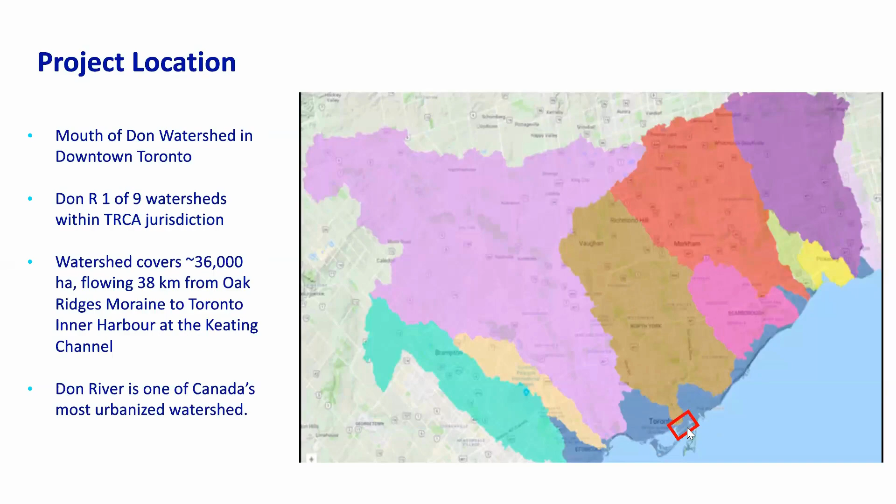For those of you who aren't aware of the project, it is located in Toronto, at the mouth of the Don watershed, which is one of 9 watersheds in the Toronto and Region Conservation Authority jurisdiction. We're located in the Portlands area as the Don River enters into a shipping channel called the Keating Channel before going into Lake Ontario.

The project area for the Portlands flood protection has been identified as the immediate area surrounding the mouth of the Don River and the Keating Channel. This is also the heart of a lot of other infrastructure activities that are currently underway.

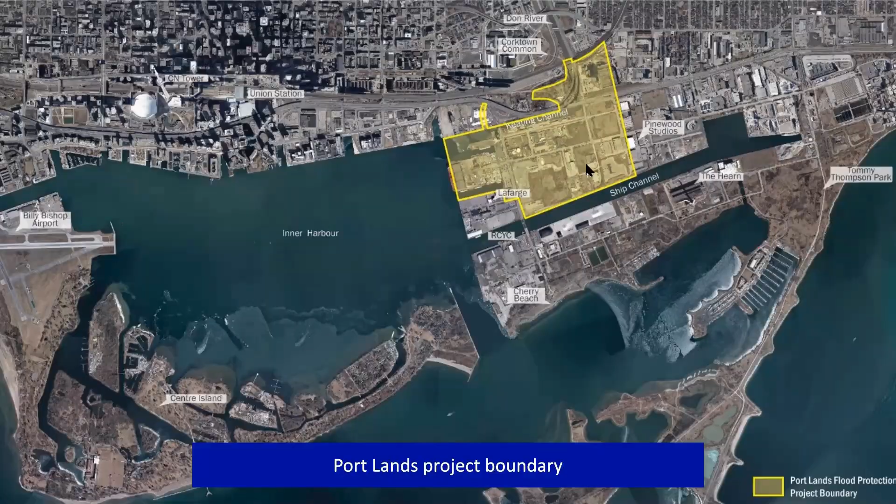This is an area that has a lot of history over the last 200 years. This used to be the location for one of the larger coastal wetlands in the Lake Ontario drainage area, called the Ashbridges Bay Wetlands. Back in the early 1900s, the Port Authority, which was the harbor commissioners at the time, decided they were going to fill in the marshes and create a large industrial area to accommodate an expanding shipping industry and other industrial activities within the Portlands area.

We had a heck of a lot of refining capacity located in the Toronto area in the 50s, 60s, and 70s before declines and the activity was discontinued and relocated elsewhere. As a result of that industrial activity, we have a legacy of significant hydrocarbons located within the groundwaters and soils of the Portlands area.

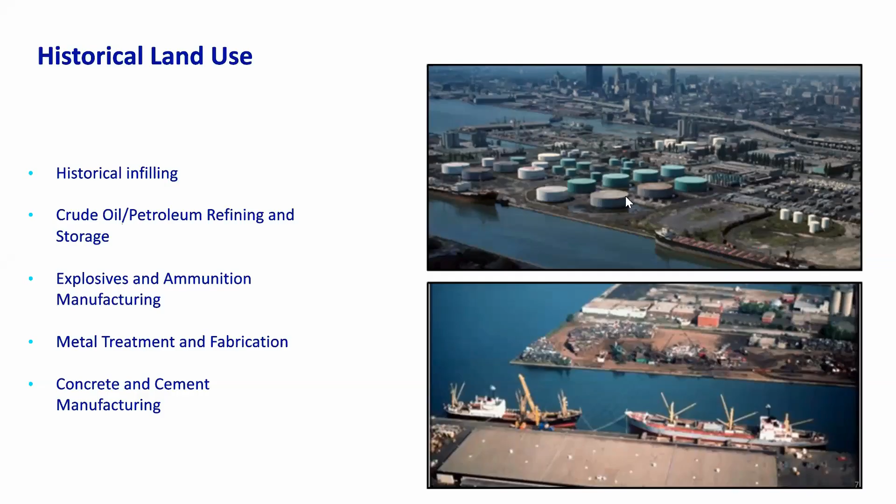We also had, during the wars, munitions and explosive manufacturing within the area. There's also a significant amount of metal treatment, fabrication, and concrete and cement manufacturing, which is one of the main activities currently underway to this day.

The Don River itself is a very sediment-laden river. It has always been known for high turbidity and high sediment loads, which contributed to the creation of the large wetlands in the first place before the city's development occurred. But as soon as we put the river into a 90-degree corner with the Keating Channel and disconnected the mouth of the river from coastal processes in Lake Ontario, we ended up with a significant sediment management issue in the Keating Channel.

We get about 30 to 40,000 cubic meters of sediment deposition in the Keating Channel each year, which needs to be dredged. Otherwise, it would rapidly fill in and substantially increase the flood risk in the area. Being one of the most urbanized watersheds in Canada, we also have a significant amount of garbage that floats down the river that has to be removed before it gets out into Lake Ontario.

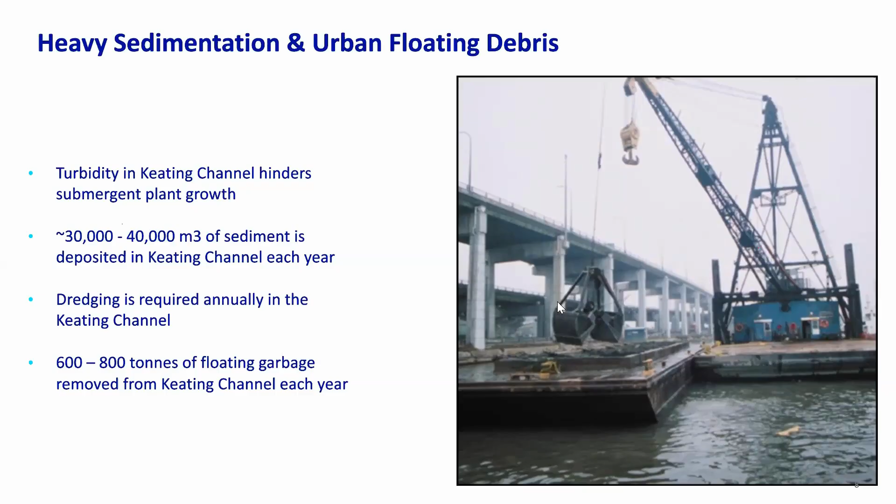There's a lot of navigation on the inner harbor, and the Port Authority is responsible for trying to minimize impacts and collisions with those vessels by managing the debris before it gets into the lake.

As you can imagine, habitat is significantly impacted in the area. You can see here, looking westward of the Keating Channel, it is a deep channel with straight vertical concrete walls. There's a lack of physical habitat, and we have a lack of vegetation on the riparian or submergent areas.

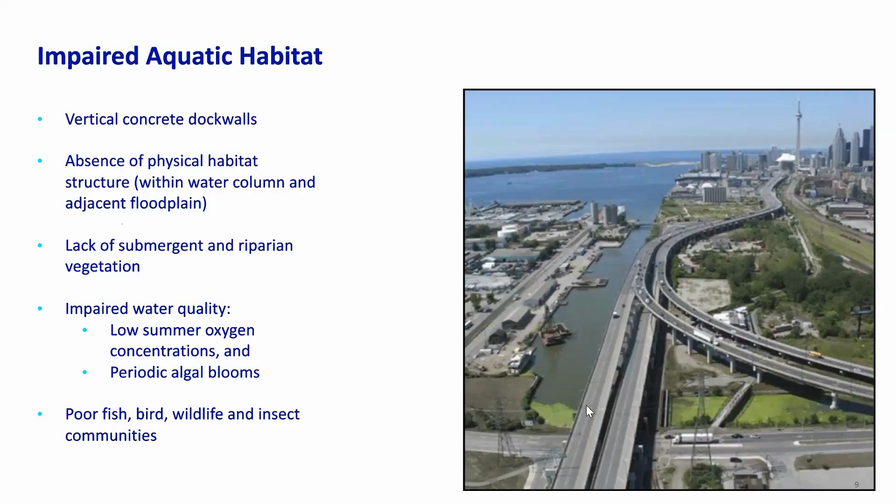During the summer, particularly hot summers, we get into some issues with water quality - low oxygen and high nutrients - which can stimulate the creation of significant algae blooms. Overall, the existing habitat is nearly non-existent for fish, birds, wildlife, and other communities.

So that was the existing conditions. This was a priority for communities since the 80s to try to improve. Over the 90s and early 2000s, we worked together to get ourselves in a position where the political powers saw the benefits of not only resolving the flood issue, but greatly creating and improving the ecological conditions of this river mouth area.

Three environmental assessments - two of them focused on the river and infrastructure around the river - worked in tandem: the Don Mouth Naturalization and Portlands Flood Protection Project, and the Lower Don Lands Master Plan, which basically identified a network of roads and infrastructure to go around the future river conditions. These were undertaken in parallel and approved in 2014 and 2015.

Most recently, there's another EA that was completed in 2017, the Gardiner East relocation and removal, that will open up public access. Portions of that project have been added to the Portlands project as recently as December 2020, so we are taking on some of the works, particularly where the Gardiner crosses the Don River before it gets into the Keating Channel.

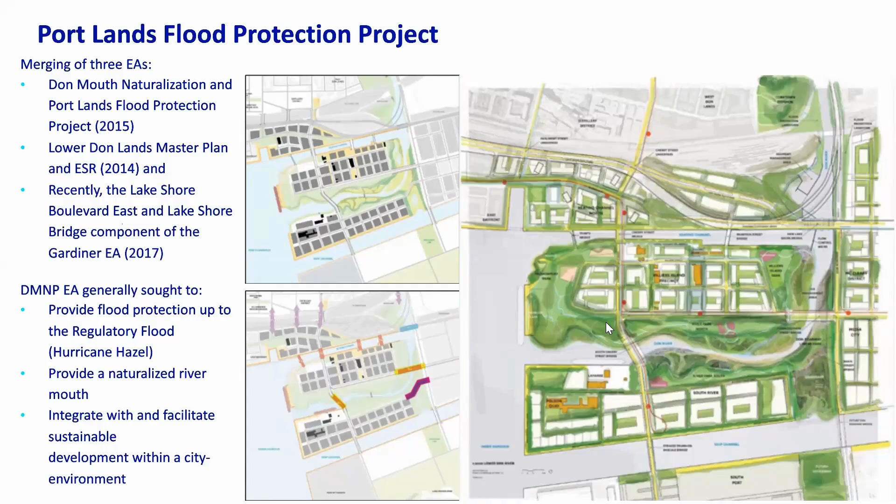So the Don Mouth project is basically looking to provide flood protection, to provide a naturalized river mouth, and also to integrate and facilitate the establishment of a revitalized, sustainable community in the area.

The intent of this is to create a naturalized river mouth that goes through the central channel valley system to allow fish and other wildlife to move up into the watershed. These two other spillways, one into the Keating Channel and one into the Ship Channel, provide capacity to split the very large regulatory flows into different paths, reducing erosivity and providing multiple outlets for the floodwaters to get out and into the lake.

The modeling has demonstrated, for the Don Mouth EA, that we can contain the regulatory flood event.

We had a little bit of an issue on the EA north of the railway tracks on the east side, but we found ways to resolve that. The main reason we didn't do anything there at the time is because most of that land is in private ownership and there wasn't development pressure to do so.

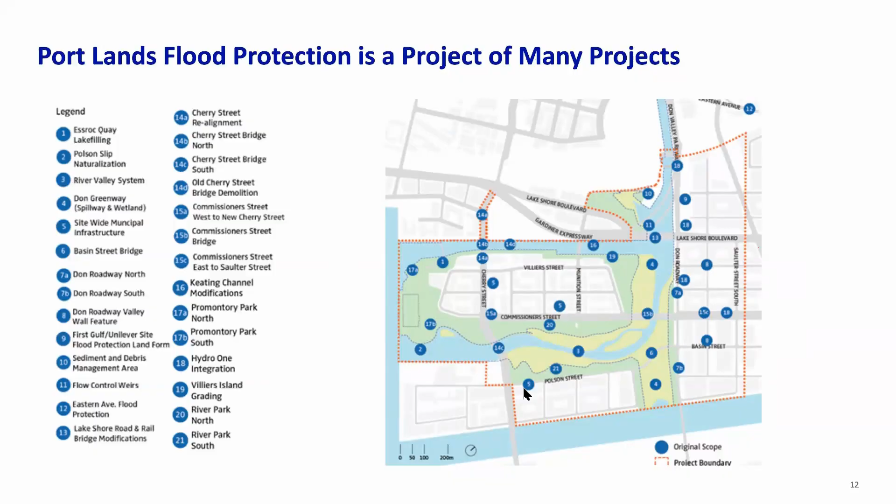Underlying all that is the question of how you manage contaminated soils left behind by the legacy of industrial activities. With that, I'll pass it over to Joey, who will talk about how we actually constructed the valley system and dealt with the soil conditions in the area.

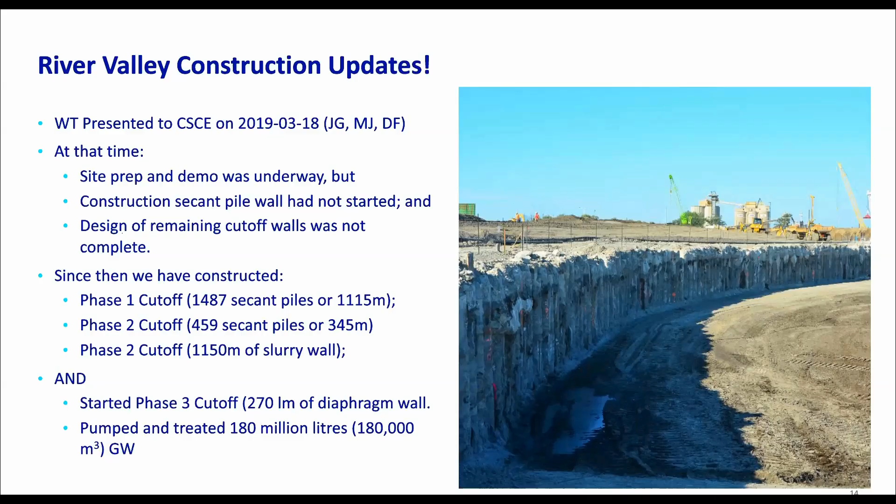A number of secant piles in 2 phases of work, over 1 kilometer of slurry wall in the second phase, and we're currently constructing approximately 270 linear meters of diaphragm wall. This is a buttressed wall that will form the west plug where the river will meet the lake. I haven't included the length of those buttresses, but this wall will serve as a dam for approximately 2 years while we're constructing on the inside, on the dry side, and then eventually we'll cut that wall down and connect to Lake Ontario. We've also pumped and treated about 180 million liters of contaminated groundwater.

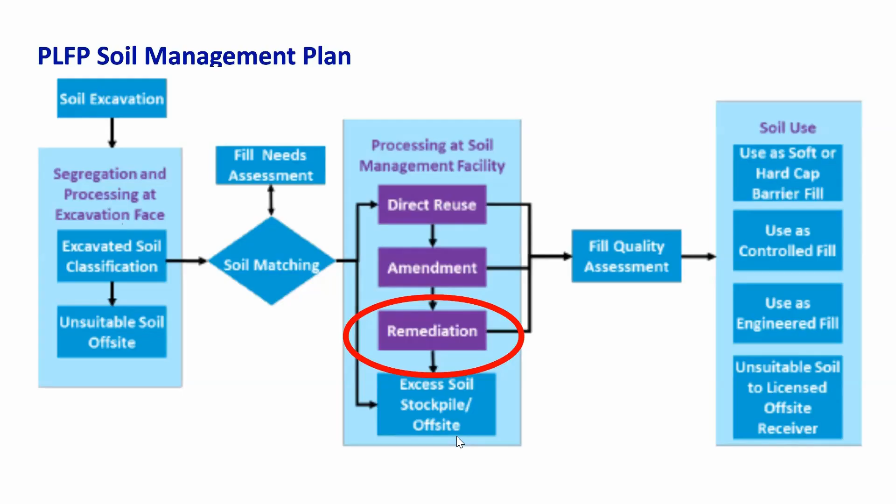This is a high level schematic of the soil management plan for PLFP. What I want to focus on here is what's circled in red, the remediation box. We just very briefly talked about how we would segregate soils.

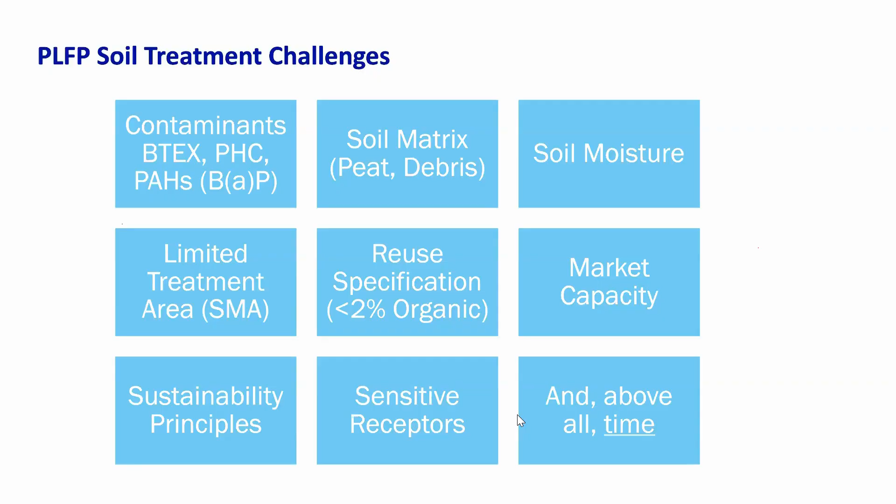The soil in the Port Lands has a real variety of contaminants present, most related to the petroleum hydrocarbon heavy industry historically there, but other industries contribute to the mix too. We have different soil types ranging from highly organic, almost like peat, to pure debris and garbage needing off-site disposal. Soil is often heavily saturated, so we have a range of moistures. We have a limited treatment area, strict reuse specifications, limited market capacity for reuse or landfill, cost concerns, but our biggest challenge is time.

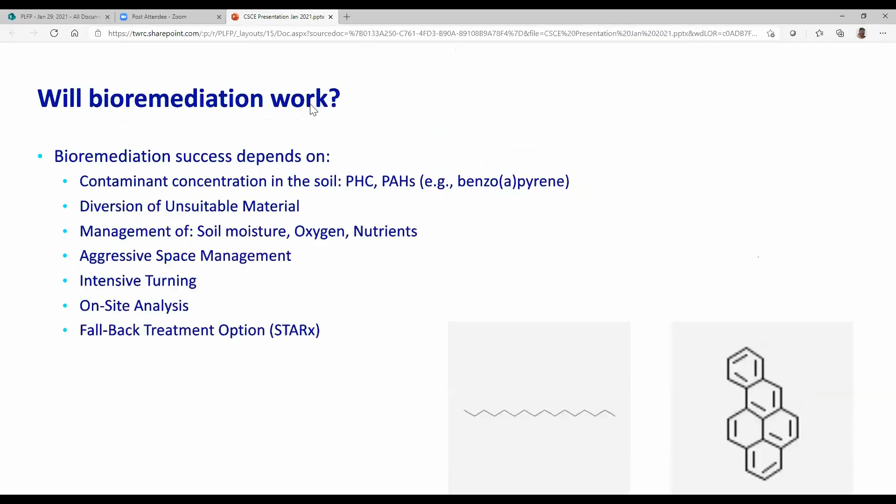For those not familiar, contaminants provide the fuel and microbes naturally present in the soil do the work. They need oxygen and nutrients to do this. These microbes aren't your standard probiotic, but naturally occur in the soil, and they convert the long chain hydrocarbons into carbon dioxide and water, and usually heat energy.

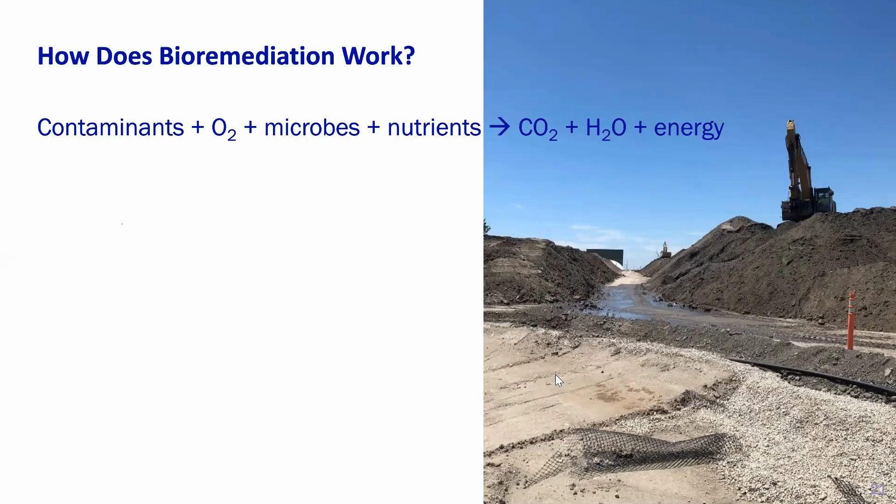This is a large scale science process, and we're managing all of these factors. We can control oxygen by mixing, moisture by adding water, and nutrients as needed. We're also measuring effectiveness by testing for contaminant concentrations, but also measuring temperature, carbon dioxide from the pile, oxygen in the pile, and so on.

On the left-hand side of the image is a standard diesel molecule. On the right is something called benzo(a)pyrene. Bioremediation doesn't work as well with the more complex molecules, so we knew we would need a plan and technology available for those more complicated hydrocarbons. But this is a quite effective method for dealing with hydrocarbons like diesel and gasoline that we have a lot of on our site.

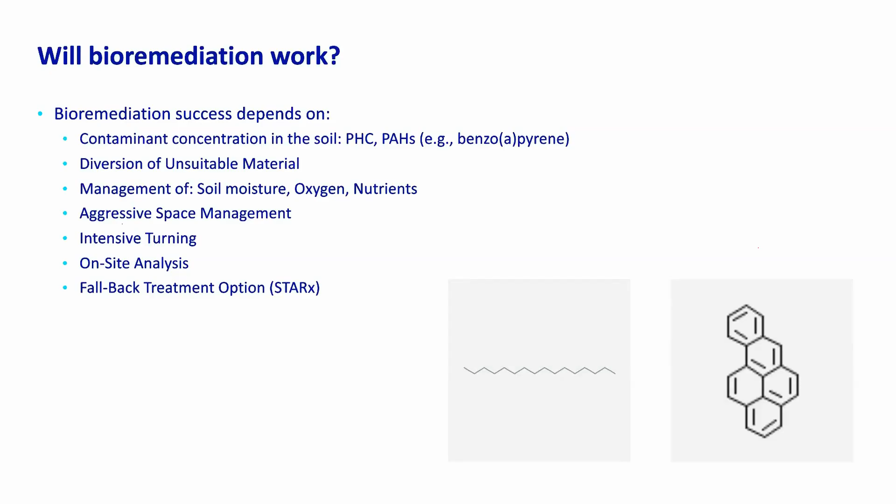Our fallback is a treatment option called STARx. STARx is an ex situ smoldering combustion technology. This also underwent on-site pilot tests in the spring of 2017, in 2018, and we did a larger scale pilot last winter, January of 2020. The soils we're targeting to put through this process will have higher contaminant concentrations.

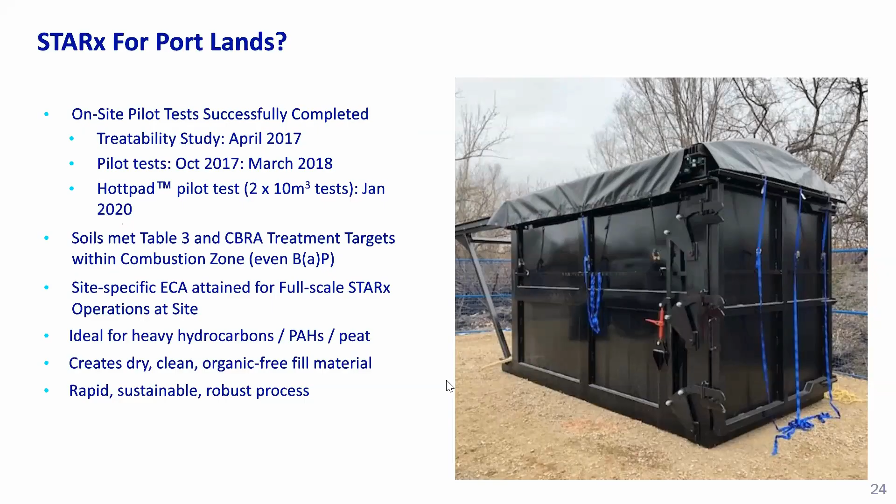There's an ECA that the subcontractor maintains for this technology. It basically creates a clean, dry soil, because it's been heated, free of organic contaminants and organic matter, leaving mineral soil. So it's fairly quick. We believe that it's fairly sustainable and quite robust an option.

I'll spend a few minutes explaining how it works. We use the PHC impacted soil as the fuel. We can inject air and add heat to get ignition, and once ignition has commenced, we can stop the addition of heat, which is basically like a large electrical element. We'll continue to use air injection to force the reaction through the treatment unit, and the combustion continues until all the fuel has been used, and at that point it puts itself out.

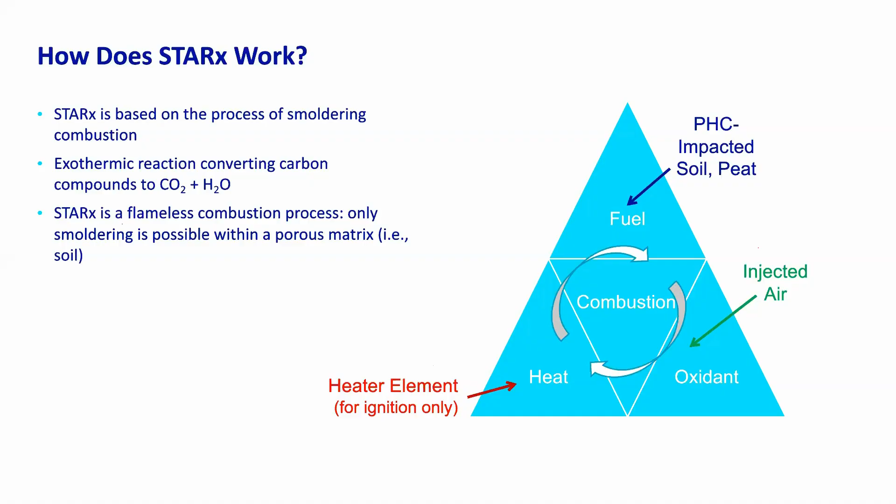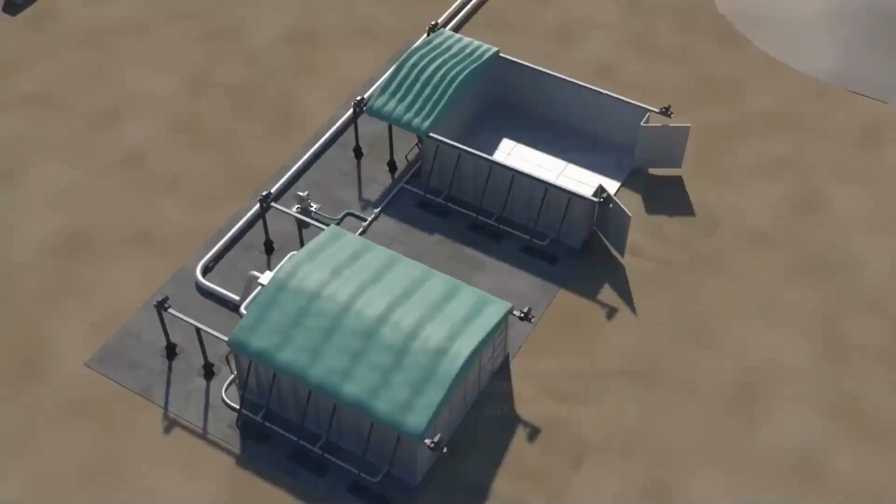So in the next slide, Ken, hopefully this works for you. There we go. Let's just watch. This is about a minute long. There's no audio, so you're not missing anything. I'll try to narrate. On our project, we're going to have 4 of these things called Hottpads.

This is a Savron technology. So they load up these Hottpads with contaminated soil. They cap it with usually soil from the previous batch, or like a clean sand. Close the lid to keep the emissions under control. They all go to a carbon unit to be cleaned and then released.

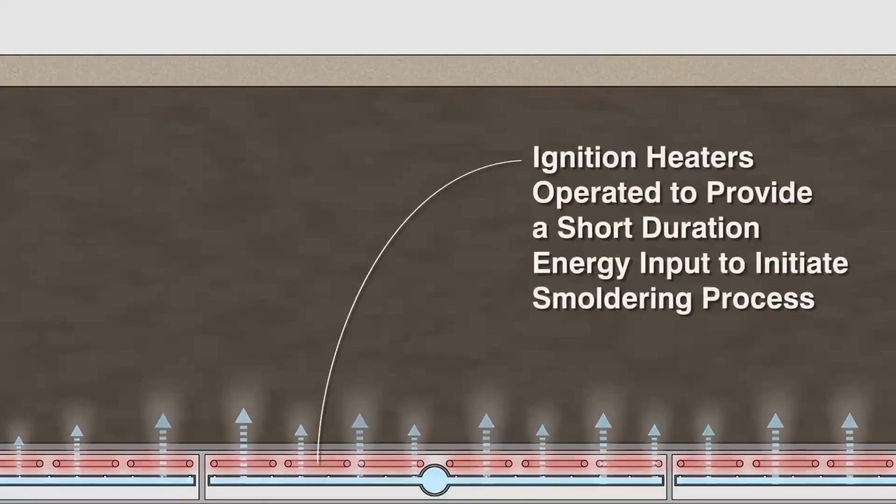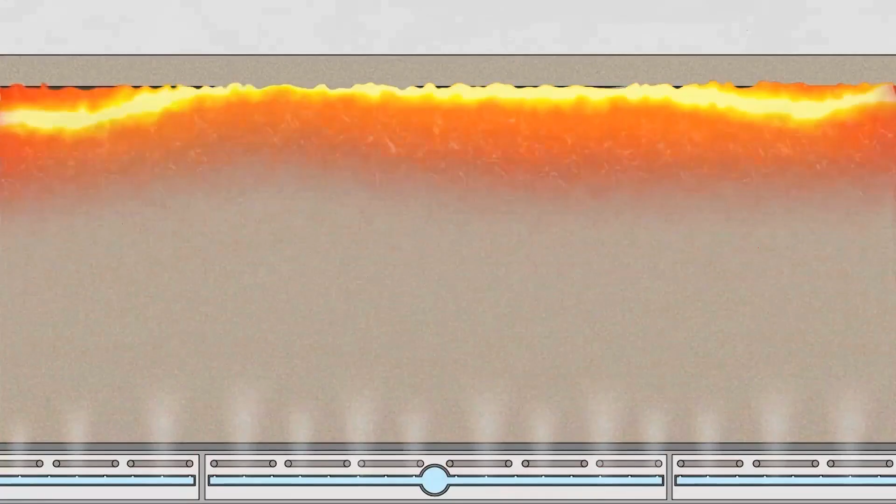We're using electricity to create the heat, air injection. And once the fuel source catches, then we slowly smolder our way from the bottom of the unit to the top. That layer of clean sand on top snuffs the reaction. We're left with a whole box full of clean treated soil.

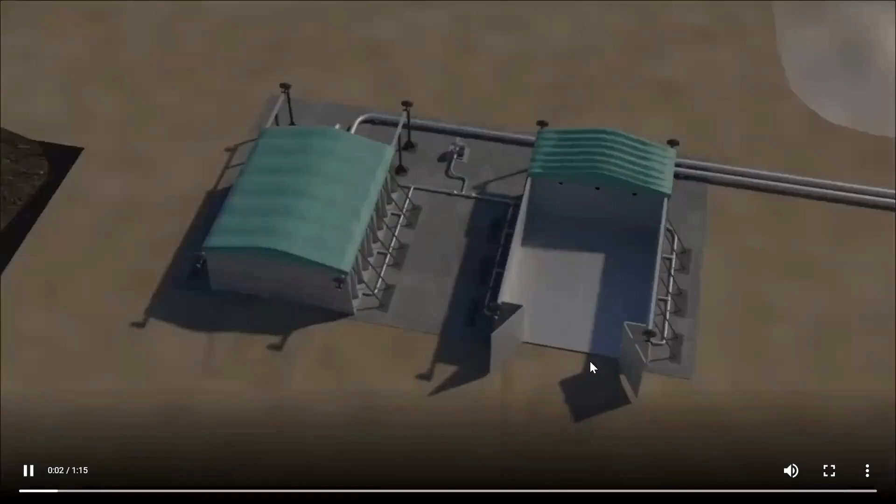So the units that we've built on site each hold 250 cubic meters. Each one is expected to take about a week to treat. So at any given time, we should be loading one, heating one up, cooling one down, and unloading the 4th one. Let's go to the next slide, Ken. We're expecting about 1,000 cubic meters of this soil per week to go through this treatment process.

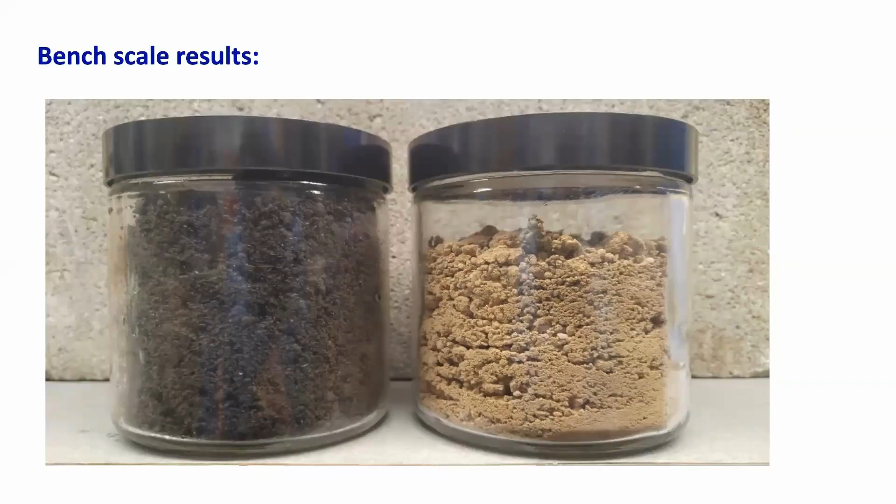Here's quickly a photo of what the bench scale results look like. On the left is obviously the contaminated soil, and on the right is the clean, organic free mineral soil. Looks a lot like sand.

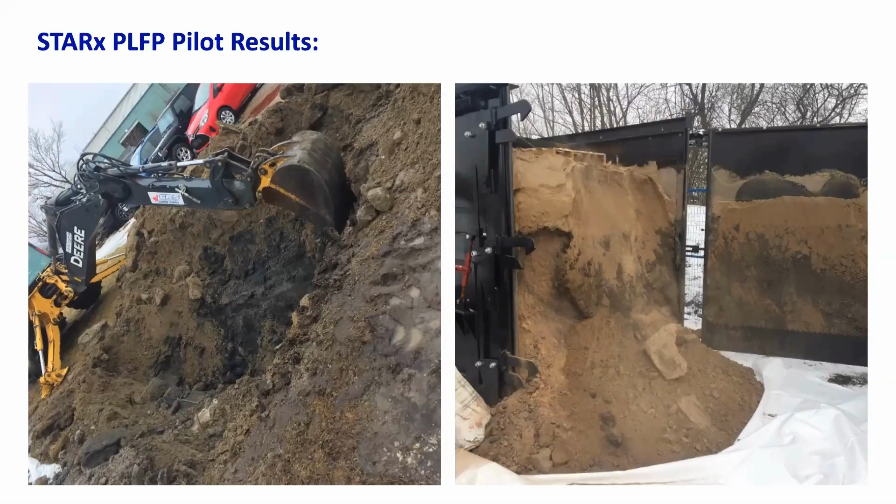Next. I apologize for the angle of the photo on the left, but that's what soil looks like on site. A bit nasty. We loaded it into this pilot scale unit. I think there were 10 cubic meters in there. System worked effectively, and what comes out the other end looks like clean mineral sand or clean mineral soil.

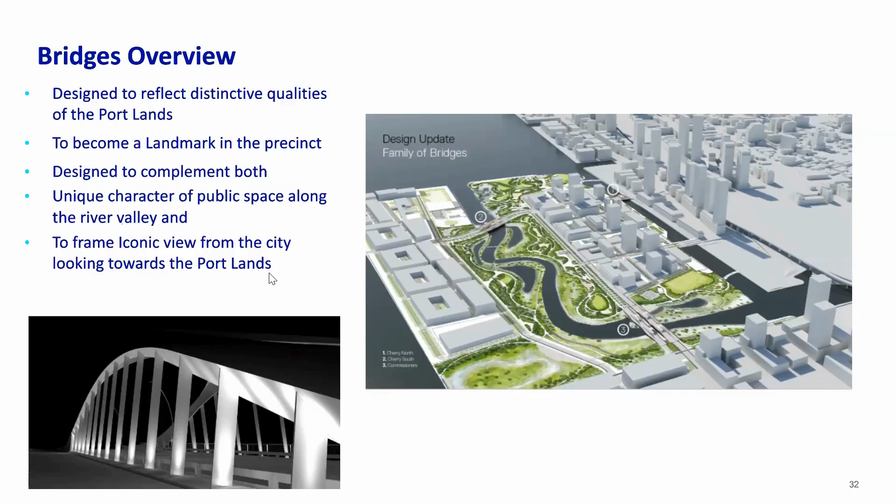Cherry Street North is technically a twin, so there are 2 bridges here. One is for transit, the other is for vehicular traffic. This is the shortest of the family of those bridges.

One thing to note on the design of these bridges: all these new bridges share common elements. They all act as a shell structure under an arch loading. The design team led by Entuitive had endeavored to develop a very streamlined and elegant shape while keeping those bridges pretty transparent, and with that, they went with steel as the element in the design you see here.

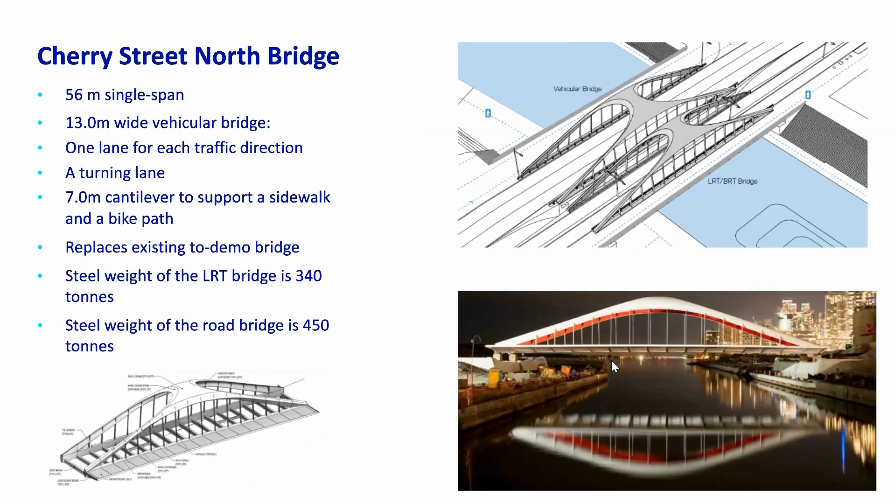Another design feature here is the color. The bridges have interior colors that vary from one to another, reflecting their unique character and illustrating the 3-dimensional shape in a closer experience. With that, we can move on to the next one.

Cherry Street South Bridge is the second longest. It is 110 meters long. The previous one was a single span; this one has a primary span and 2 secondary spans.

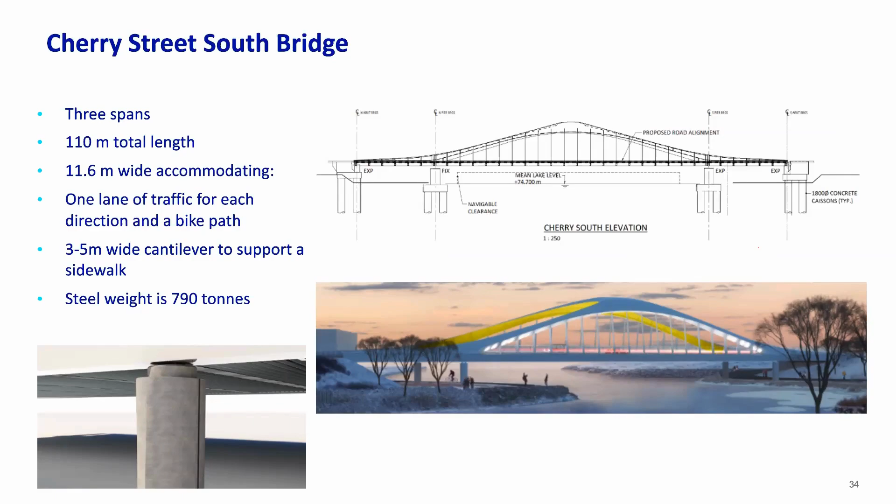On Cherry Street South, the interior color is going to be yellow. In the bottom left, you can see another design feature, the pier supporting Cherry Street South and Commissioner Street bridges, where the pier has a nice elegant shape and also functions in the way it reacts and behaves with water flows and ice flooding.

We can move on. Finally, among the new bridges, Commissioner Street Bridge is the longest at 152 meters in length. You see it has 2 shell structures basically meeting halfway.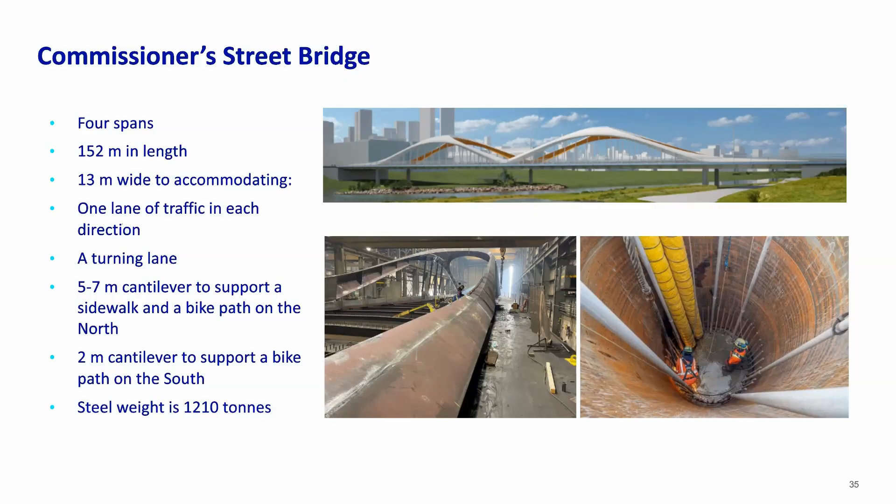So stay tuned. On the right side, just to illustrate the magnitude, this is one caisson for this bridge, the same size caisson we're using for Cherry Street South. It's 2.4 meters, and it goes deep, through bedrock. We can move on, Ken.

So with that, I'll talk briefly about the Lakeshore Bridge modifications. While the new bridges we've been discussing required a great deal of design effort, Lakeshore Bridge is more about structures and engineering.

You see two bays here, the existing bridge under the Gardiner-Logan ramps. As you heard from Ken, the area is subject to dredging and river flows. We need to widen this bridge, make it twice as long, so you can imagine these two lengths on the west side will eventually be turned into water.

So you can imagine what happens structurally here: you have live ramp bents, live bridge bents sitting right around an area that is today soil, and they will become water. At the same time, you could imagine equipment, deep foundation equipment, trying to go there and install caissons or some type of foundation with limited reach, especially under the westbound ramp.

So we've been in discussions, exploring opportunities with our colleagues at the city to analyze the possibility of accelerating the portion of the city's Gardiner EA scope, which includes work on this ramp as well. Finally, the City Council adopted the city staff report last December, supporting us entering into an agreement with the city to deliver these two portions of the projects together.

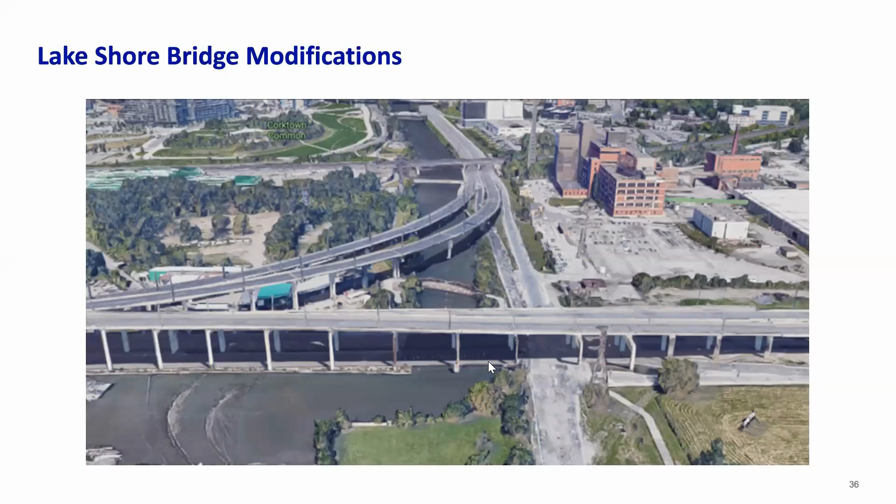It will provide shoreline support for this new area, create a wetland within the river valley, as well as provide some recreational and ecological opportunities for this project.

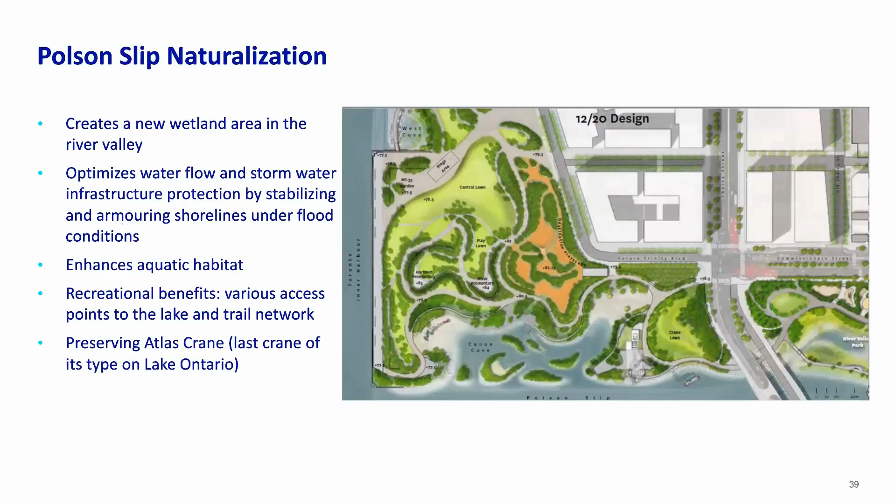For this area, there's going to be a lot of dock wall work, trying to stabilize the bottom portion of the wall and then taking it down, dealing with the soils, treating them, and building up the layers to create the islands and the finishings within that area.

One more interesting thing about the Polson Slip is that it houses the Atlas crane, which we are preserving and which we believe is the last of its kind in Lake Ontario.

Sediment and debris management area is the next one. Going back to the fact we need to widen upstream of Lakeshore Bridge in order to allow the flow to slow down and encourage sediment deposition there, so it wouldn't keep going down to the Keating Channel, as you saw the dredging used to happen there, or even worse, get into the naturalized river.

So that includes deepening of the current channel, and widening again, about twice as much. There will be dock wall stabilization and new dock walls in order to support all this area.

It's very integrated with the delivery of the Lakeshore Bridge, and it's pretty interesting, neat engineering and construction project when it comes to tackling these two projects together, as well as the Gardiner, as you can see.

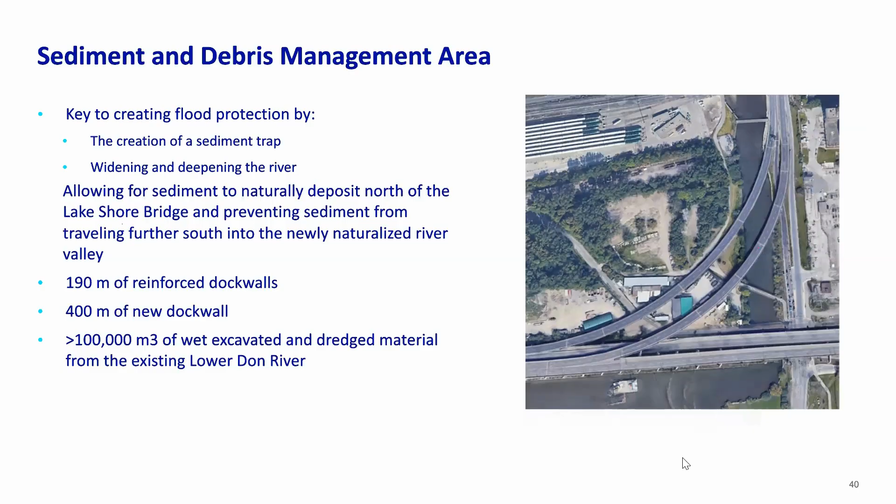You can see here also, in the same principle, the bents are still existing. Eventually they will become part of the Gardiner EA, the DVP ramp bents here. So what we've done in the interim is lower this area enough to allow the water to flow over top and provide flood protection, while keeping it high enough to maintain those bents' structural integrity until it's time for them to go, and this area can be taken back. We'll be building as much of the final structure as we could right off the bat, so it's easier to deal with later.

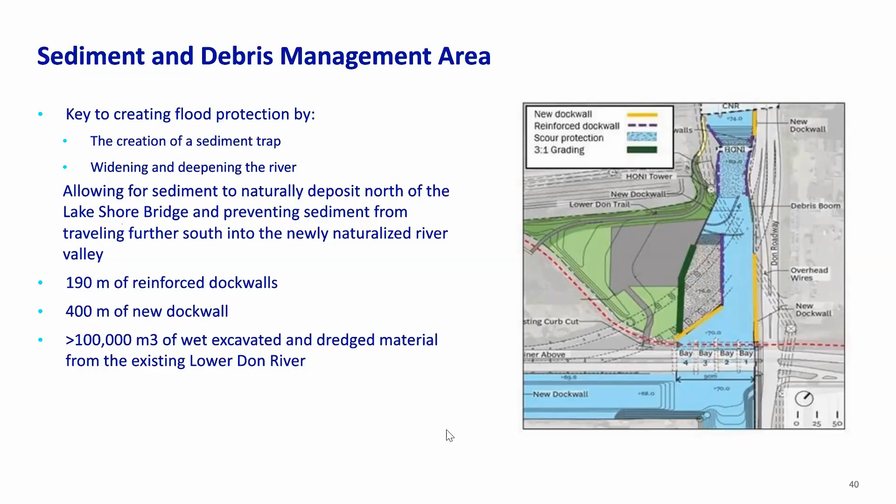Finally, under the marine components, a flow curtain in the Keating Channel. When we started, that was going to be a combination of structured weirs. As the design evolved, our team, led by MVVA, came to a more nimble system that would deliver the same requirements, but is more portable and efficient.

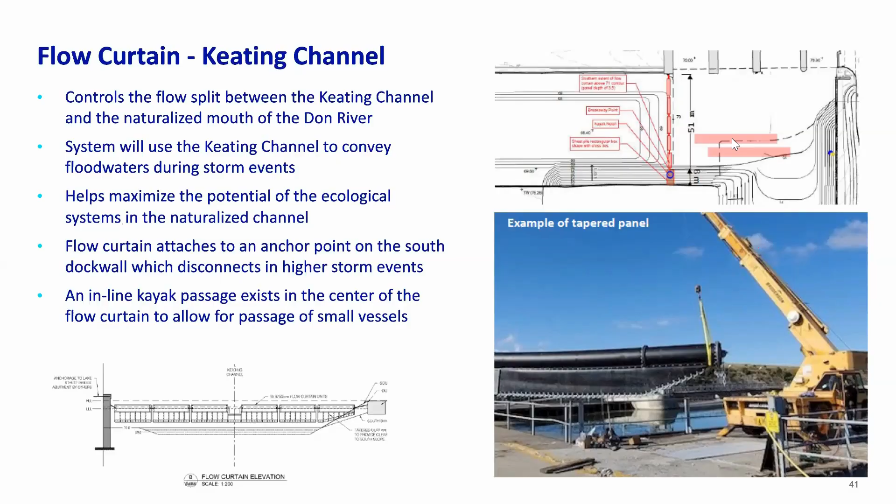This comprises a boom, and the boom has a panel under it. When flows are slower, more water will be flowing in the river. In flood events or higher flow events, the panels will rotate with the direction of the flow, and more water will make its way into the Keating Channel, relieving the river valley.

Move on. This is the final one: the Cherry Street Stormwater Lake Filling.

Built in 2017, this was the first project we built on the Portlands. The CSLF stabilizes the shoreline around the Essroc Quay and provides a lot of ecological habitat and opportunities. Equally important, it supports the new Cherry Street North Bridge that you've seen already on site in the previous picture, as well as the realigned Cherry Street.

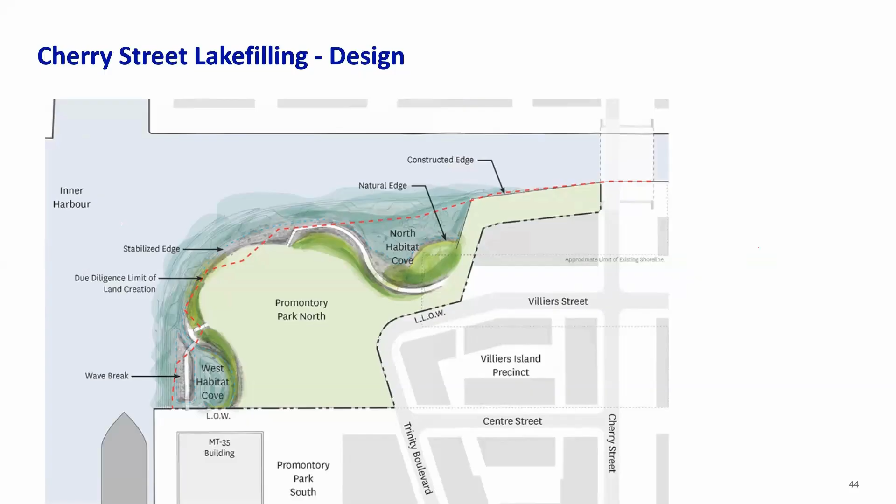Thank you, Ken. Now we're getting into the shallow dives I described. The first one is the lake fill we just went through. You can see the design of the project: it comprises about 200 meters of dock wall on the east side, then two coves, and this whole shoreline is about 400 meters long. It was basically supported by a core stone core before we went ahead and did some revetment.

I'm going to show you some pictures of the construction of that project and how it evolved. The left picture is the very first barge that arrived on site delivering core stone material. As you can see, the lake was almost fully frozen. It was December 2017, and since then we received many more barges and deliveries. I put some numbers for the facts, for those of you who like to see some metrics, and we can move on.

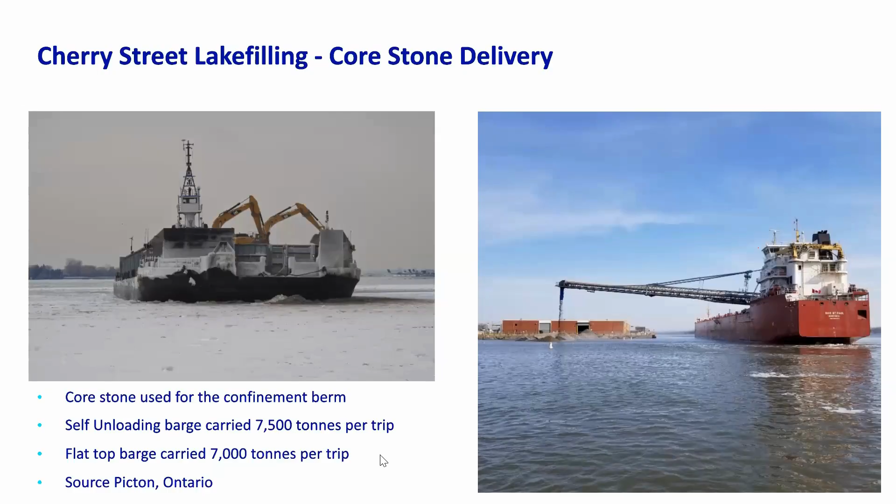There are some examples of the ecological habitat and marine landscaping done there. On the right you could see West Cove, but you're only seeing the trees here—these are not live trees. They are intentionally positioned that way to contribute to the ecological habitat, with a lot of trees, logs, and sunken roots underneath that you won't see.

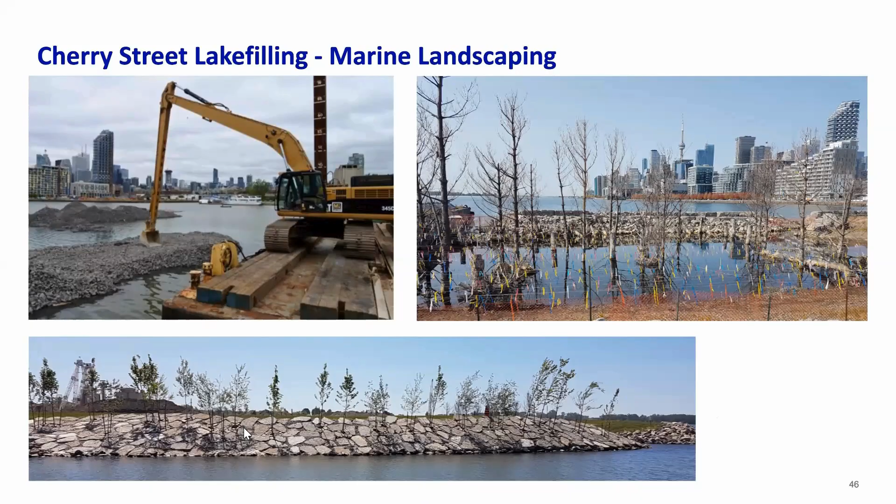In front of the other shoreline, for example in the bottom picture, the interesting part is these are live trees, and they are stable within the naturalized, armored shoreline. So we can move on to the next one.

Now a couple of shots from the same vantage point. This shows when we started in the very first year, 2018. You could see the core stone. In order to fill in the lake, the material has to follow quality criteria, and we had to work within confined water bodies to comply with the confined lake filling guidelines. So we built the green sea cans on that area.

They are what we call the interim berm—the quickest enclosure we could do to start filling while we built the other, larger enclosures that took more time. So the core stone as a core does the basic shaping, as you saw, coming from the vessels. And here is a dock wall. We can move on now, Ken.

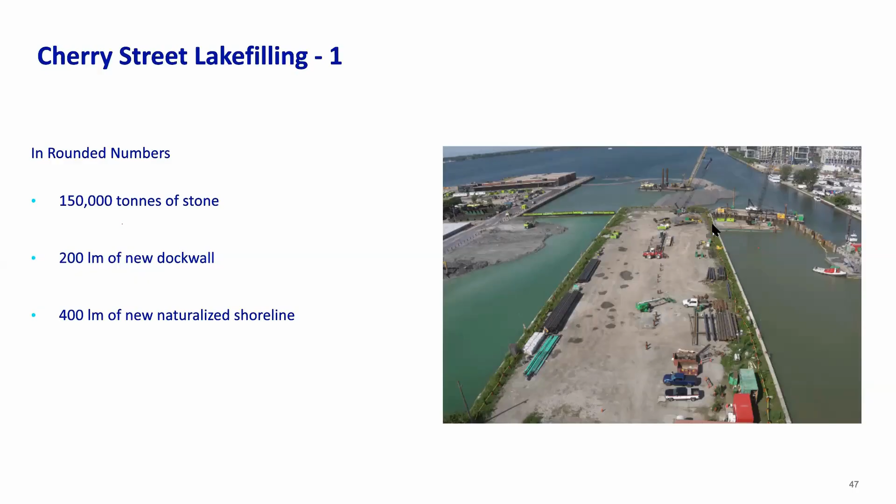As you see, with more enclosures we have more areas being filled. The bottom left part was filled first, and then we progressed further beyond to do that line. Finally we did the fill behind the dock wall.

One thing worth noting here—two things actually—is that closer to the camera you could see the type of fill is different. There is a granular type material, intentionally used there to help with the structural stability of the road and infrastructure that will come over it, and to accelerate the settlement time required. Another interesting fact is that we received 24,600 trucks of material from local excavation sites—material that would have otherwise gone most likely for disposal.

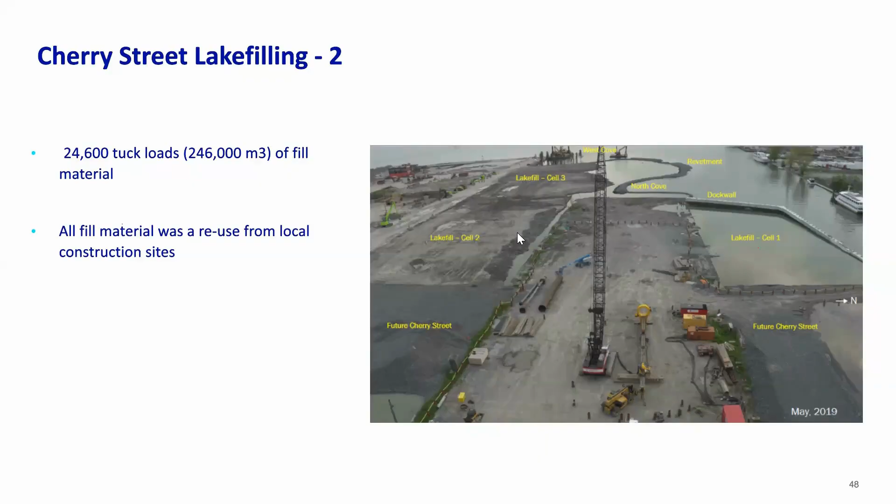The Port Lands part 2 presentation will actually be just about this LRT bridge, as I understand. I highly encourage those of you interested in the details of the fabrication, construction, and design to attend that meeting—I think it's next Tuesday.

So here you could see the bridge. This is all at the Cherubini Metalworks facility in Dartmouth, Nova Scotia. The bottom left shows the transit bridge being fabricated—they start with the bridge upside down. There's a cradle where they do the penetration welds and put together these very thick sheets that have already been pre-bent into the 3D shape in the Netherlands. Once the shell is built, they flip it upside down and start building the rest of the components.

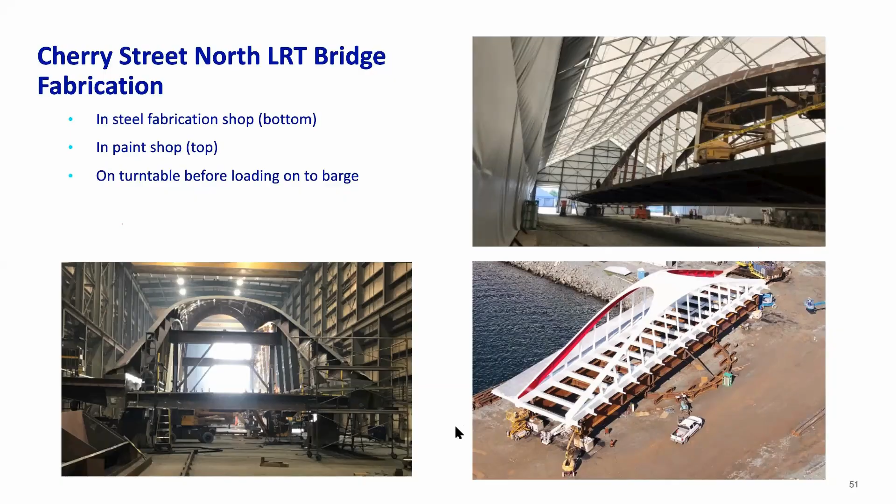On the top right you see the same bridge in the painting shop, and finally in the bottom right the bridge is basically ready to make its way to us. That was another exciting journey for us, when the bridge was sailing through the St. Lawrence Seaway on its way to Toronto.

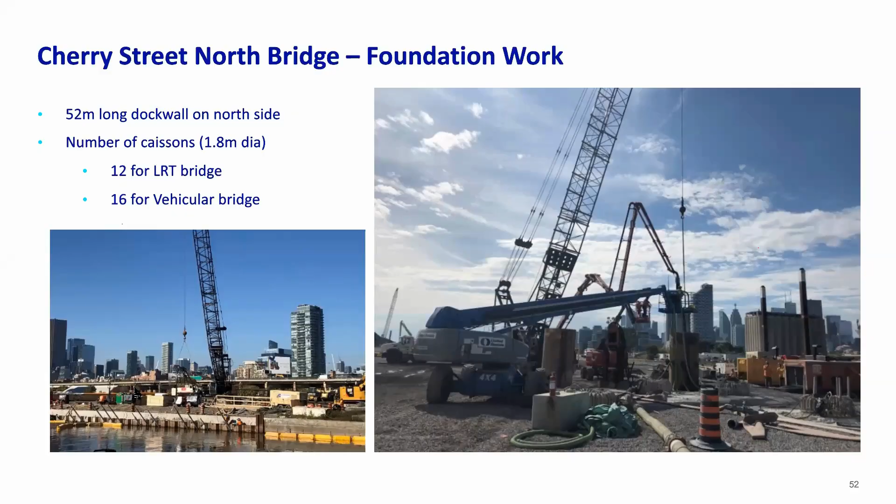There's another link I forgot to put here, but you could look for Bridgewatch Toronto, or Bridgewatch TO, and see a lot of footage about it on Twitter, LinkedIn, and other outlets. So just some images of the construction while fabrication was happening in the shop in Nova Scotia—we were busy building the foundations here, with caisson work ongoing as well as dock wall construction on the north side, to rehabilitate the dock wall before we put the bridge on top of it and limit future opportunities for rehabilitating it.

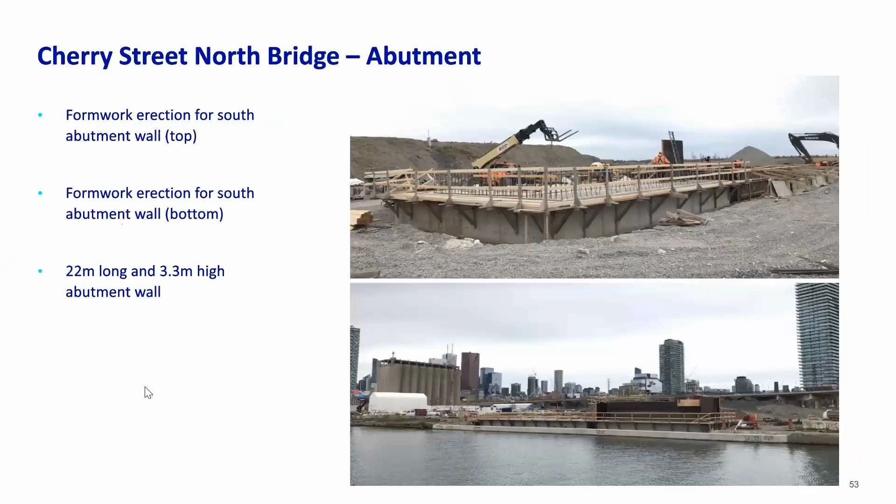We can move on to the next. So more pictures about the construction progress and the formation and construction of the abutments. We'll move on. In other shots, you can see more footage as this progresses, with finally the bridge making its place.

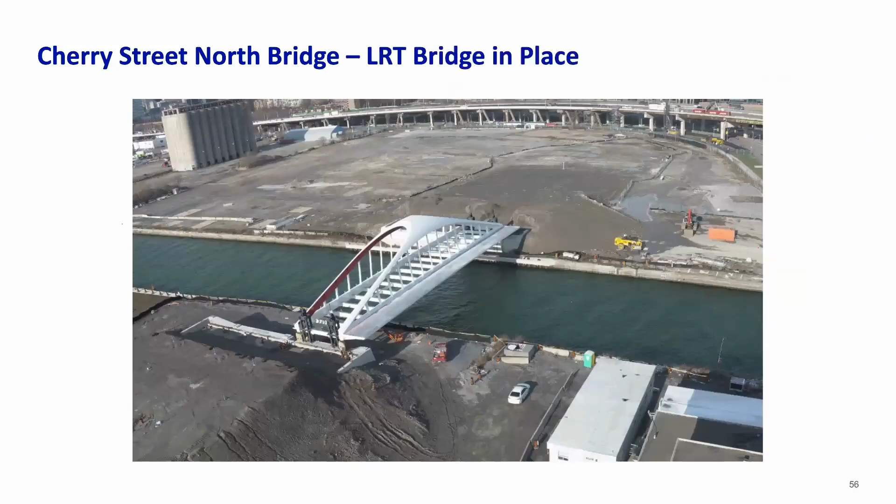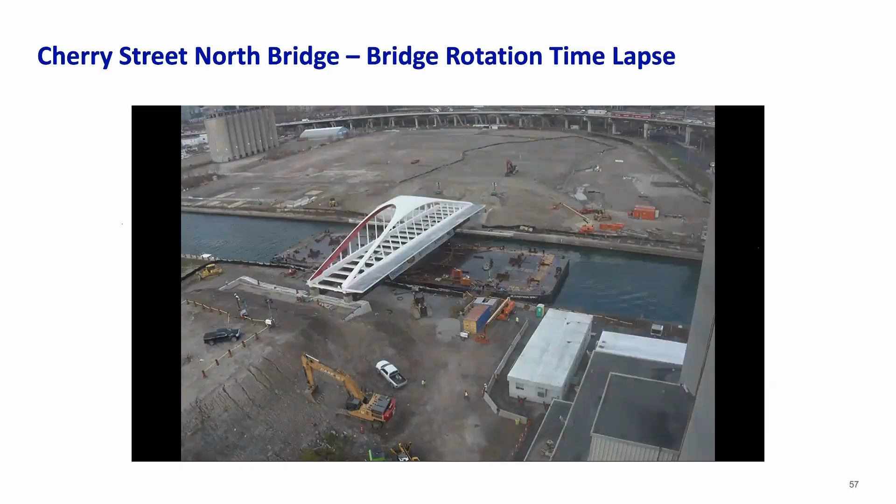The last thing you'll see is a quick time lapse of the bridge being rotated into place. The barge arrives in place, and the bridge is rotated with cables using the dozers on the four corners. Once it's in place, the barge gets ballasted, filled with water to be lowered, letting the bridge sit on its abutment and bearing spots, and then it sails away.

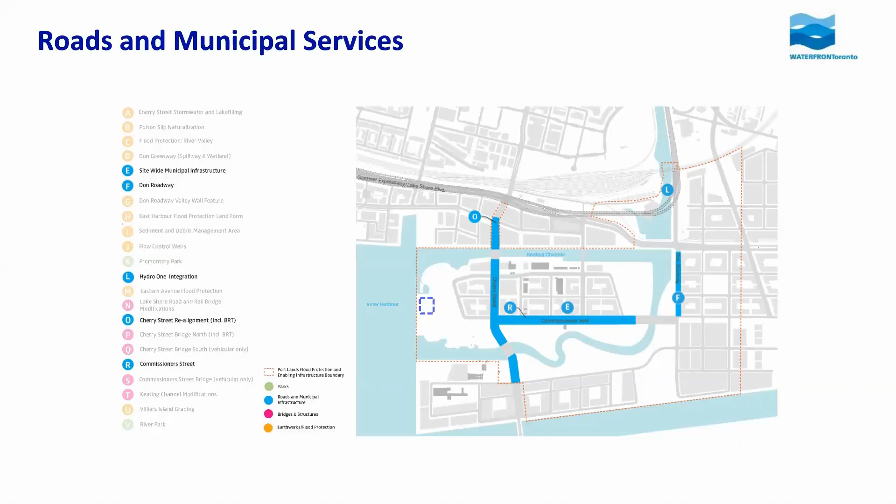So if you'd like to move on, Ken, we can go to the next slide.

Waterfront Toronto has placed a high degree of importance on design excellence. It's a big part of what we do at Waterfront Toronto, and the vision for each of these three streets is very strong. They each have unique identities, particularly because Cherry Street is going to be the gateway into this new neighborhood. There's a number of different urban design elements we've incorporated into the street to underline that character.

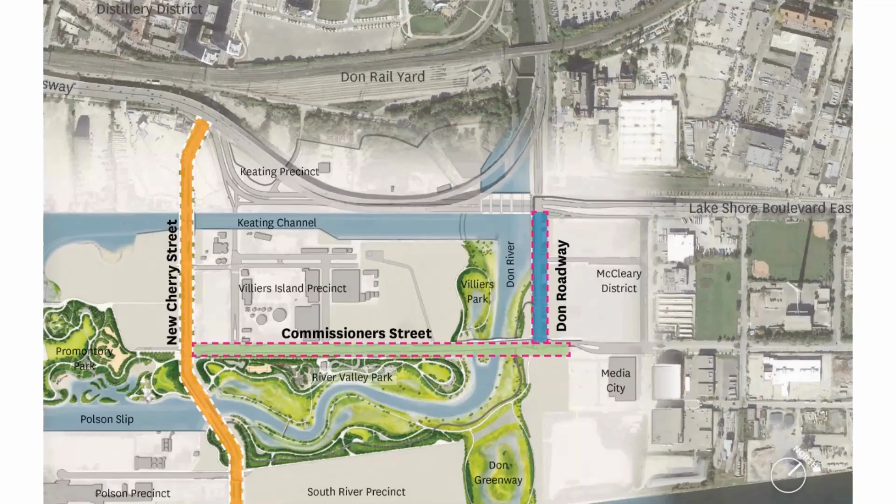Commissioners Street, because it runs along the length of the new river and River Park North — the massive park we're building on the north shore with nature play, dog off-leash areas, picnic areas, and barbecues — will be very similar to the character of the park, and hopefully will visually read as part of it. The Don Roadway, adjacent to this new section of the Don River, also has that unique siting incorporated into its design approach.

If you go to the next slide, Ken, you'll see a couple of renderings that give an indication of where we hope these streets will eventually go. Cherry Street is really the gateway into this new neighborhood, and will be seen as very much an urban street. Eventually, when Villiers Island is developed, it will have a very urban character.

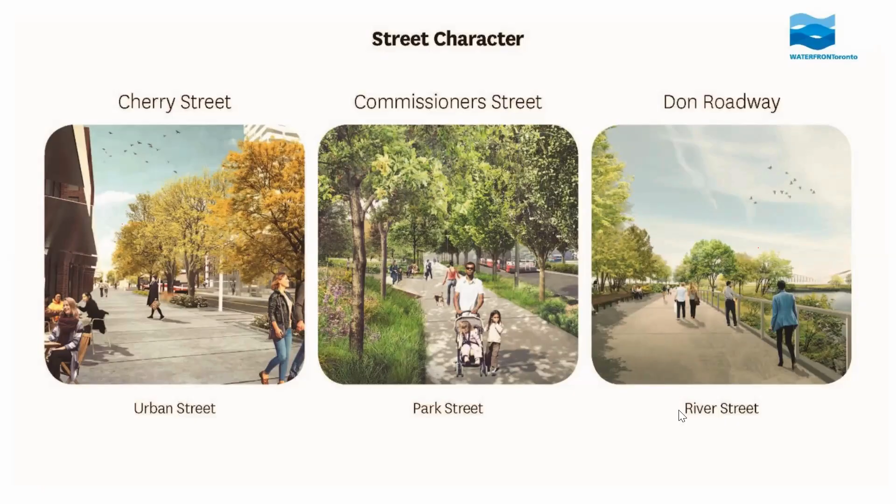Commissioners Street, because it's adjacent to one of the new parks, we've really tried to pull the park across the street, so that as a user you feel immersed in the park itself rather than in an ordinary streetscape. The Don Roadway, adjacent to the new river, provides an opportunity for a promenade along the river, which we've incorporated into the design approach as well.

So as we move to the next slide, I'll take you through some of these design elements.

Cherry Street really takes its design reference from the industrial character of the Portlands. There are some salvaged elements that will go into the streetscape, including striping that incorporates metal pieces from what used to be the Marine Terminal 35 site, which burned down a couple of years ago, and some of the weigh scales left in the parking lot. Those pieces will be salvaged and moved over to Cherry Street.

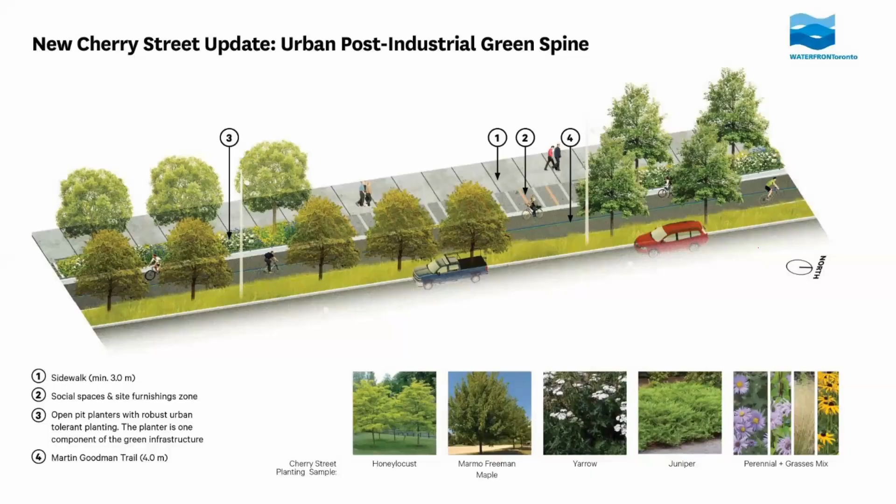There's also a green infrastructure approach to all of these streets, which we'll talk about in more detail at the end of the presentation. Again, we're really trying to lead with the landscape on all of these streets and set the stage for the development and new neighborhoods that will come along as the area develops.

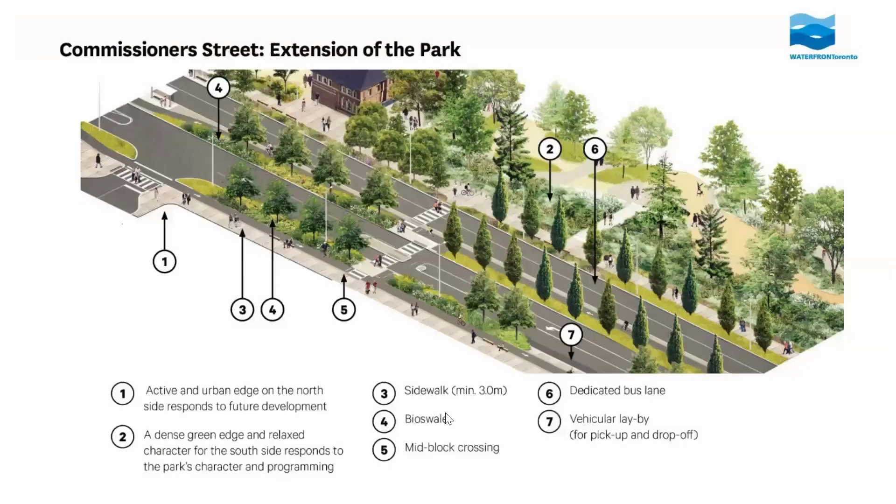Next slide - Commissioners Street. Again, a lot of effort went into pulling the visual identity of the park across the street. The parks are being designed by Michael Van Valkenburgh Associates, who are also the lead consultants on the entire project and have an integrator role. The streetscapes are designed by DTAH and WSP, so all three firms work closely together to ensure that the design of all elements works together visually and aesthetically.

Some considerations on Commissioner Street - it's a fairly wide right-of-way, about 40 meters. Along Commissioner Street, as well as on Cherry Street, we've made provision for a future TTC right-of-way, which had been contemplated as a BRT right-of-way at some stages of the project, and will in the future be developed as an LRT right-of-way.

So we looked a lot at ways to ensure people could get across the site safely, and we've introduced several mid-block crossings on Commissioner Street because it's a long cross section crossing multiple modes - bike lanes, a transit corridor, as well as the vehicular lanes of traffic. We thought that was important.

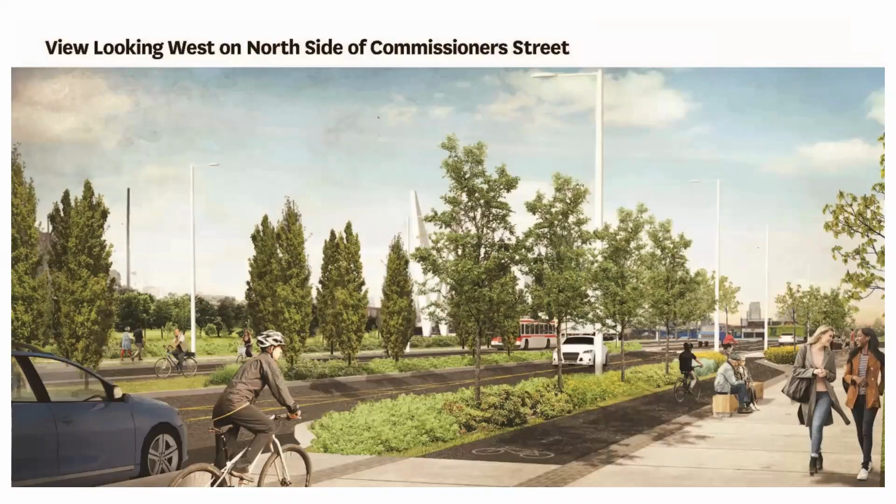Often in streetscape design, these trees are used to create side friction on either side, bringing in the scale of the street, making it feel more pedestrian-oriented, and slowing cars down as much as possible to avoid conflict. Next slide.

So we're moving on now to the Don Roadway, which flanks the new river, and its identity really takes a lot of inspiration from that location. The other interesting aspect of the Portlands is that it's very close to Tommy Thompson Park and the Leslie Spit, which is a major stopover for migrating birds on the North American flyway. We anticipate that our site, as the river is developed, will also become part of that overall ecological system. So we decided to pay careful attention to the ecological characteristics of the streets and look at them as habitat as well as streetscapes that need to move cars and people and bikes and transit vehicles.

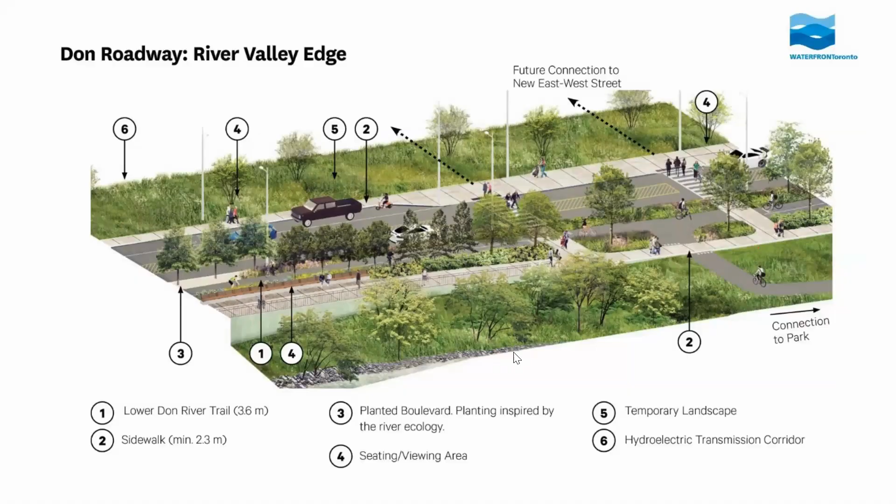A conversation we've had throughout the Portlands project is that while we certainly strive to bring nature into the city - and I think we've all seen throughout the last year how important it is to have access to nature in the city - it also raises some challenges, because you don't want to create areas which might put wildlife into conflict with cars and trucks in the future. So there's a careful balance in terms of the design to ensure that we're not creating areas which might injure or cause harm to wildlife as they stop over.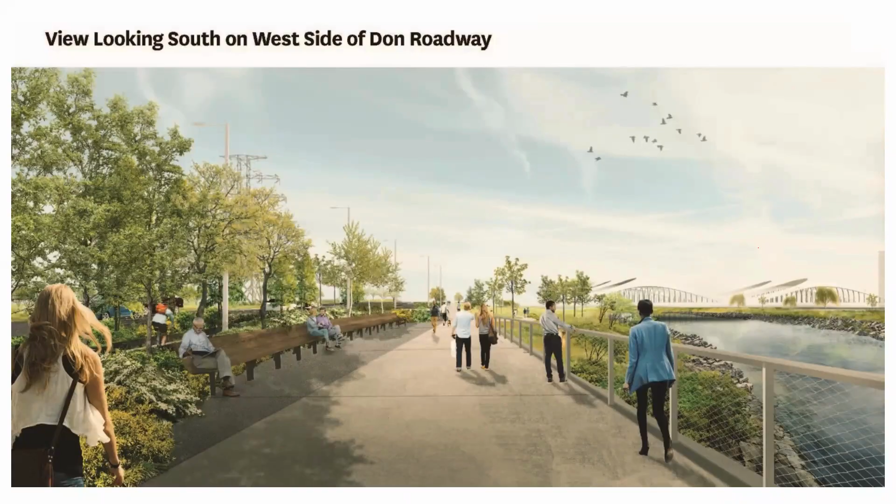The Don Valley Trail also comes down the length of the Don Roadway and then connects into the river. That forms a very wide regional connection in terms of cycling infrastructure, because you can connect into the entire length of the Don Valley Trail system, which loops around and will end now at Cherry Street, which is of course where the Martin Goodman Trail comes down to Cherry Beach and will be rebuilt as part of the cross section for Cherry Street as well.

Next slide. So I mentioned the right-of-way of Commissioner Street is a wide one at 40 meters. In fact, all of these streets are wide - Cherry Street is also a 40-meter right-of-way. That was a bit of a challenge in terms of the design, because we wanted to create streets that were urban in character and very walkable, very cyclable. But we had a number of different modes of transportation to accommodate as we designed the streets.

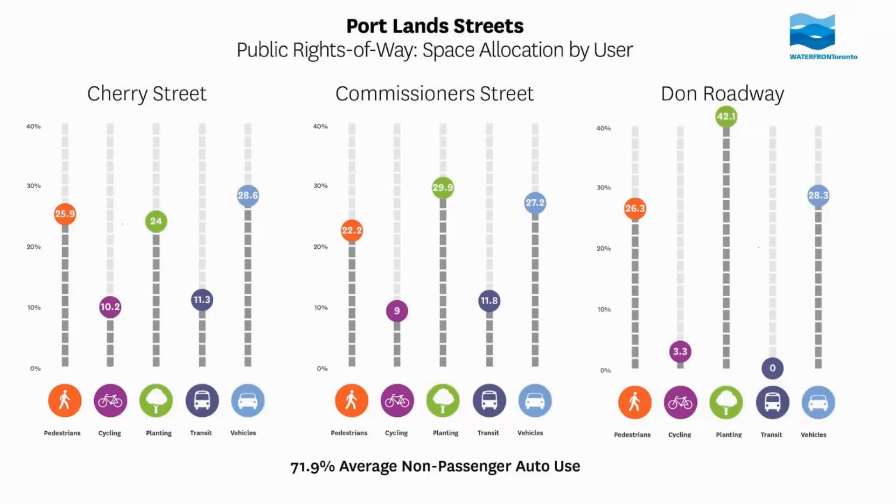And we're also pretty proud that we've been able to retain a large section of these streets for green infrastructure and for planting. Cherry Street is a quarter green, and Commissioner Street is 30% green. The Don Roadway is 42% - that's a little bit skewed, to be honest, because we've got a wide boulevard section on the east side we can pull from. But again, just underlining the real emphasis we've put on creating spaces that accommodate all modes safely and take a complete street approach, while also underlining the importance of nature, particularly in this area.

Next slide. So lastly, just a little bit about the green infrastructure that we're implementing in the streets. Some challenges here, of course, because we're right at the lake, which means our groundwater level is quite high, and particularly over the last couple of years with high lake levels, it's really been quite high and difficult to accommodate, both in the stormwater system design as well as in the design of these features.

So we've incorporated a number of different types of features, from open planters to bioswales and grass swales, as well as in some cases just a temporary landscape. This is in fact what the BRT corridor will be in the interim now before the LRT is developed - a pollinator meadow with a lot of opportunity to capture water and keep it on the landscape and use it for trees.

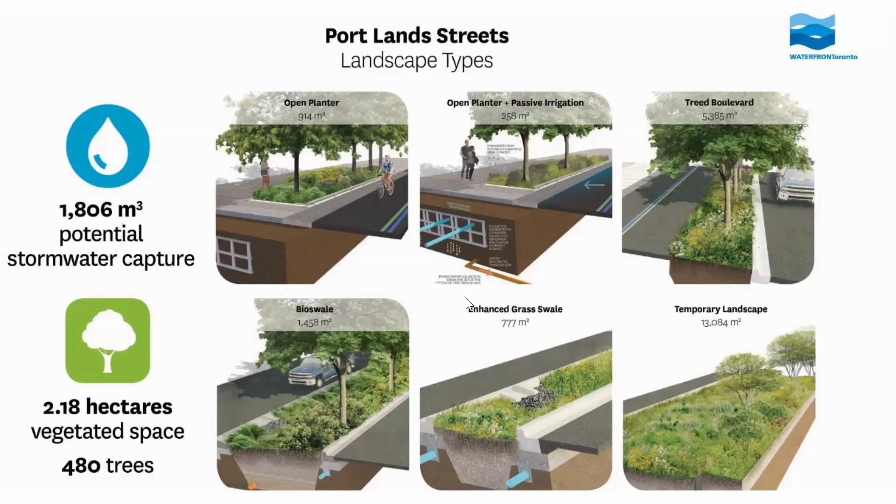And to support the plantings within the plant beds as well. So 480 trees you can see there - a lot of trees that we're adding to this neighborhood - and just over 2 hectares of vegetated space. So again, quite a lot of green space that will be added to the streetscapes of the Portlands when we're finished. Next slide.

Just a further detail on some of the mechanisms we're incorporating, using soil cells in the open planter with passive irrigation. In addition to providing enough soil volume to keep the trees healthy and improve their survivability rates, this also provides space for infiltration.

Some of the challenges we've had here also relate to what Joey was saying about contamination. So we've given careful detail to environmental barriers and risk management measures for the streets, to ensure they remain clean and that these corridors are clean for the future. There are a lot of geotechnical constraints as well.

We're in construction right now, moving into some of the wet utility construction with microtunneling and HDD operations getting underway. We've been surcharging a number of areas, in some cases for a year or so. As that material settles out and we get the compaction we need, we'll proceed with construction of Cherry Street and Commissioner Street, and lastly the Don Roadway over in the east.

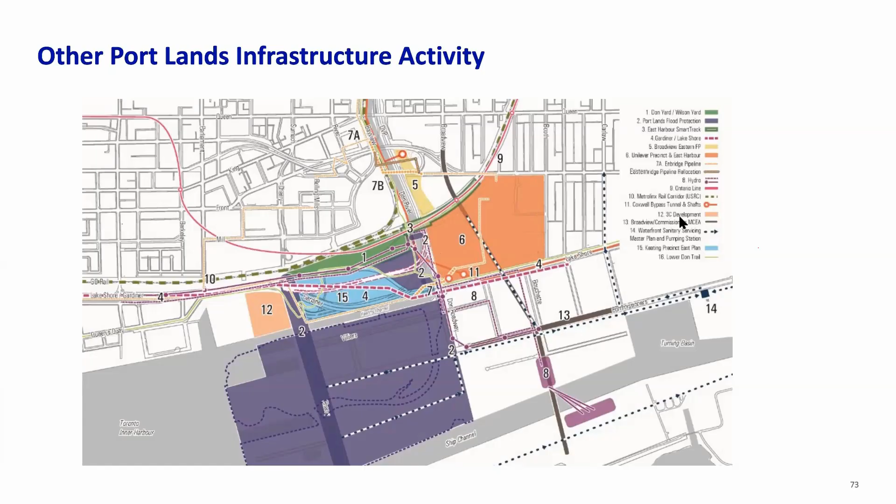So this gives you an idea of what we have to deal with. Number one is the Metrolinx USRC staging area rail yards project underway to increase capacity in their storage of trains. Two is our Portlands project. Three, we have a Smart Track station, East Harbor Station, being advanced on the east side of the Don River. We have the Gardiner works that we're now actually integrating into the PLFP project directly, with other portions phased into our work, as Simon talked about in the sediment management area. We also have the Broadview Eastern Flood Protection Project, and I'll get into a little more detail on these.

With the Broadview Eastern Flood Protection Project, as I noted at the beginning of the presentation when showing the hydrological map distribution after the Portlands was implemented, we were left with about 8 hectares of land at risk of flooding, after all was said and done, on the north side of the railway embankment that goes into Union Station.

The reason we didn't address this at the time is that most of the land is in private ownership. We were originally able to come up with a concept where we proposed to raise the grade on the Eastern Avenue underpass of the railway tracks so water ponds on the north side. We've dropped the water levels from what was previous, but we don't resolve the issues and don't allow the water to spill into the South Riverdale precinct.

After the EA was completed, city plans were looking at an extension of Broadview Avenue for an LRT, which basically put another opening in the railway embankment. Subsequently, other plans came along for a railway station on the embankment, which gave us an impetus to look for a solution and finalize flood protection works on the east side of the Don River, north of the tracks. So we were working with TRCA, the City, and Waterfront Toronto to come up with the concept. Our EA is done.

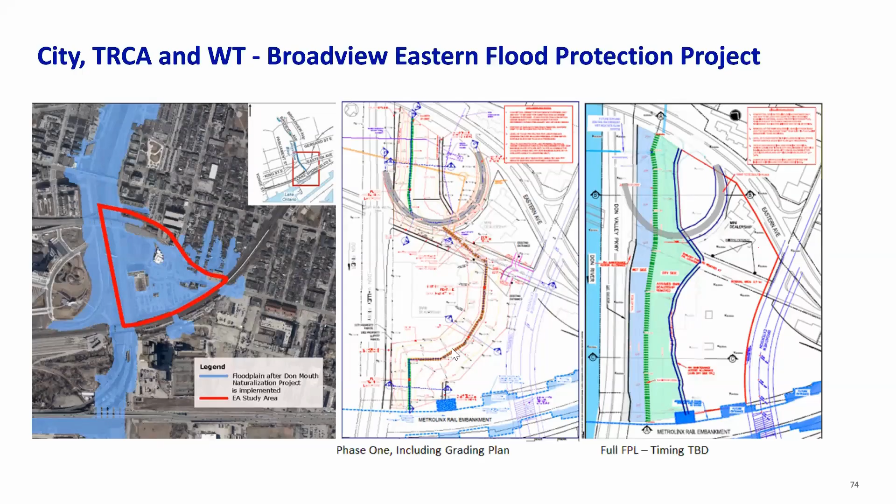So we came up with a phased approach to our ultimate preferred solution, where we create a landform in its final configuration on city-owned lands in the northern portion, and then build the southern connection where railway expansion work is occurring at the same time. We'll then be able to raise the parking lot on the privately owned lands while allowing the commercial operations to continue in the long-term period. This provides a permanent solution that eliminates that last bit of flood exposure in the area, so we ultimately have a long-term solution addressing the full floodplain originally identified at the beginning of the presentation.

A flood protection landform is basically a very wide structure intended to extend what's essentially a naturalized valley that ends around Eastern Avenue, extending that valley wall further south to the railway embankment itself. It's created with such wide conditions that the risk of failure is essentially zero, whether due to the unlikely case of water overtopping it and scouring the top, or water being able to percolate through or seep underneath the structure.

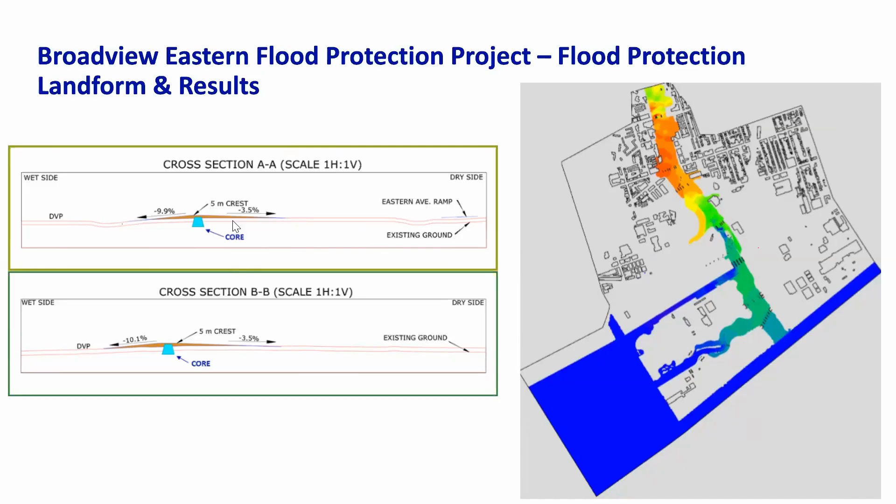That's an important piece, because Metrolinx is undertaking work with Cadillac Fairview on a new design for East Harbour Station. This will be the first stop after Union Station, and will become a multi-transit hub for the future developments on the Cadillac Fairview site.

As you recall from Broadview, we had issues with water coming underneath the underpass at Eastern, and a future one at Broadview. There are changes coming with the station that basically make this berm entirely porous, and this requires a new solution on the north side of the railway tracks to allow the station work to proceed while maintaining flood protection. So we are working closely with Metrolinx and other partners to advance the approvals and hopefully the design and implementation of the total flood protection work.

We also need to tie in the flood protection on the south side with the Ontario Line expansion, which is a new subway I'll get into shortly, making sure our new flood protection structures in the Broadview Eastern work can be fully integrated into the overall plan.

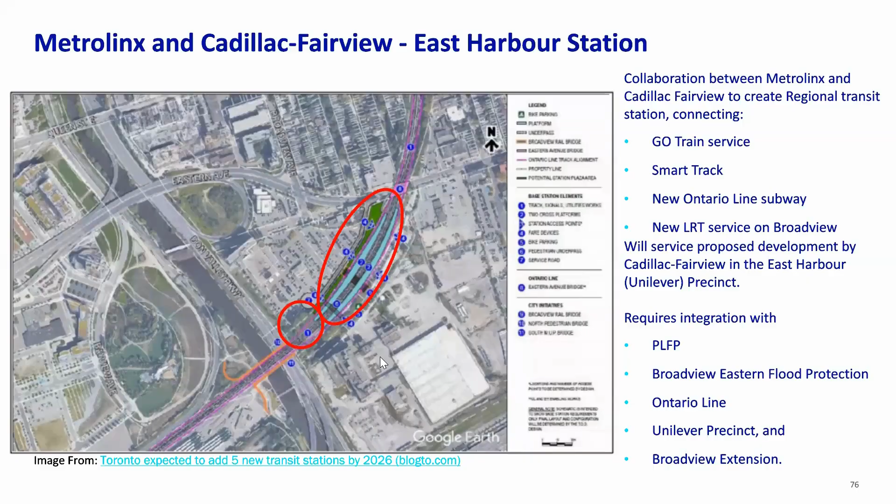This is a new subway that replaced the TTC subway relief line that was in planning up until 2019. Metrolinx was assigned responsibility to take it over. This is a relief subway line proposed to reduce the amount of traffic on the existing two main subway lines that feed into downtown Toronto.

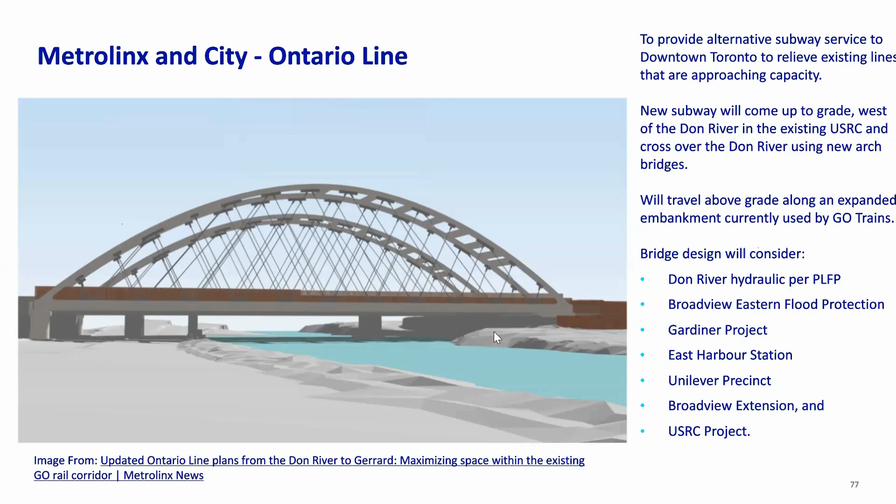This will follow along the elevated railway embankments and come above grade within the USRC on the west side of the Don River train yard, coming up to grade and crossing the Don River on two new arch bridges, requiring the widening of the railway embankment on the east side of the Don River where it ties in with the future East Harbour Station. Of course, any new bridge structures will have potential impacts on hydraulic conveyance due to the incorporation of new piers, so there's a lot of coordination with the Metrolinx team to make sure their bridge design works in concert with the hydraulic flood protection solutions we're developing comprehensively for the river in the area.

The main impetus originally for the Broadview Eastern Flood Protection Project was the city's plans to put in an extension of Broadview Avenue. The city is currently advancing their own EA using the Municipal Class EA stage 3 and 4 process to get into the details of what that road will look like as it goes underneath the railway embankment and back up into the future development block on the south side, on lands owned by Cadillac Fairview.

This work also involves an improved connection from Eastern Avenue itself to the DVP. So we have some significant integration requirements we've been working on with the city, to make sure our future flood protection landform on the north side of the railway embankment will be able to accommodate that enhanced road traffic getting into the DVP.

In addition, the extension of the Broadview Avenue work also has to tie in with the new Lakeshore Boulevard East work that Simon and Shannon were talking about, recently added to the Portlands flood protection, to make sure that new road design coming in from the north fits perfectly with the work we're advancing right now. A component also requiring flood protection is a large landform that Cadillac Fairview will build on their own property along the Don Roadway, and the proposed east-west street identified in the Broadview Extension project needs to conform with the grading requirements for that future flood protection. So there's a lot of integration work going on there.

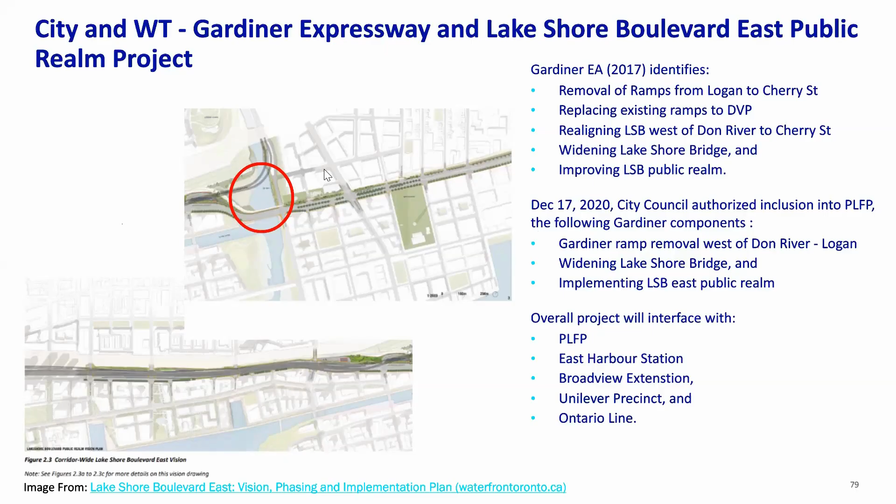Simon started getting into some of the challenges we had during the sediment management area, and how we need to integrate those pieces of work for the sediment management area on an interim and final basis, related to those DVP ramp works.

I also alluded to the Union Station corridor. This is work by Metrolinx looking to expand their rail yard so trains can sit during off-peak hours close to Union Station. This has significant implications for the scheduling and design process of our sediment management area. It also has implications for the work we're undertaking on the Cherry Street Lakeshore integration process so that we can get the new road alignment in. There's been some significant coordination on that.

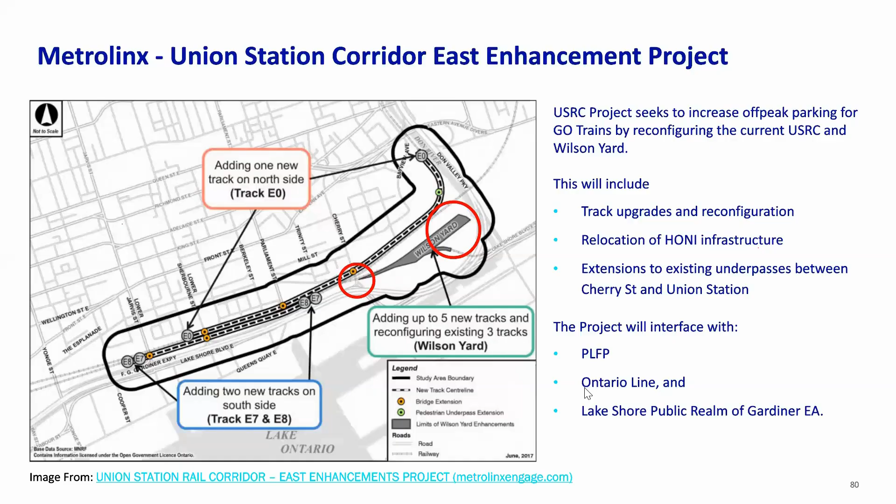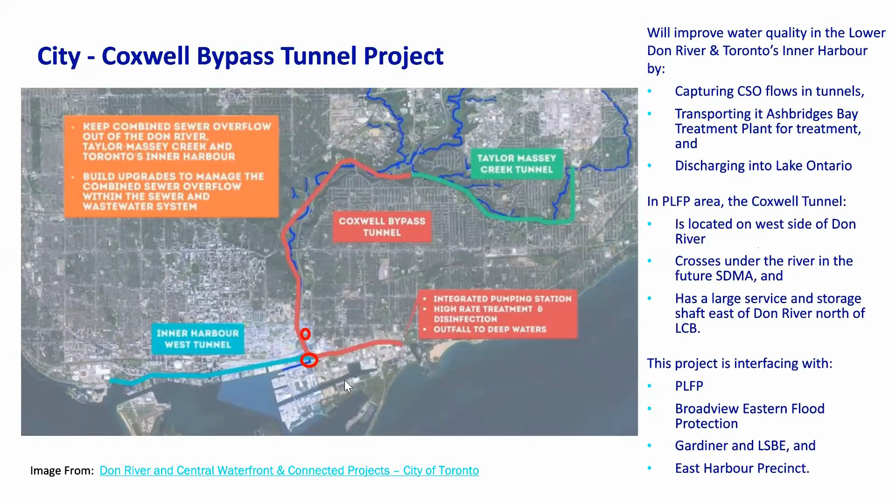This is my last slide. We've alluded to it many times — the East Harbor precinct development is owned by Cadillac Fairview. They're in a partnership with Metrolinx on the East Harbor Station, trying to create a massive new mixed-use development site with over 50,000 new jobs, a lot of retail, cultural, public space, and entertainment, connected by this new East Harbor multimodal station. It's also connected by the enhanced Lakeshore we're providing, and of course close proximity to the DVP.

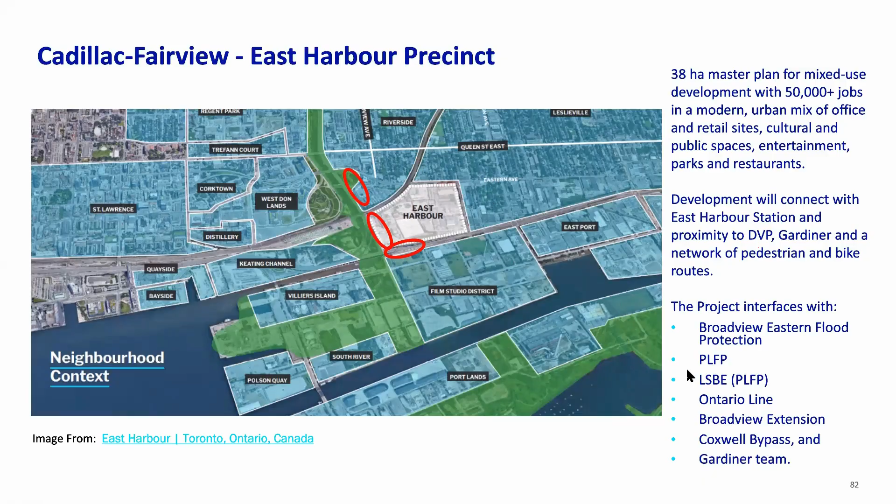There's a lot of integration work. We're working very closely with Cadillac Fairview to make sure we integrate not only the Lakeshore Boulevard work and their flood protection designs, but also the Broadview Eastern flood protection works on the north side, so all of this can be delivered between now and 2026. There's a whole slew of major engineering activities with a multitude of different agencies and interests that all have to work together to achieve our various objectives in a coordinated fashion. So that is it.